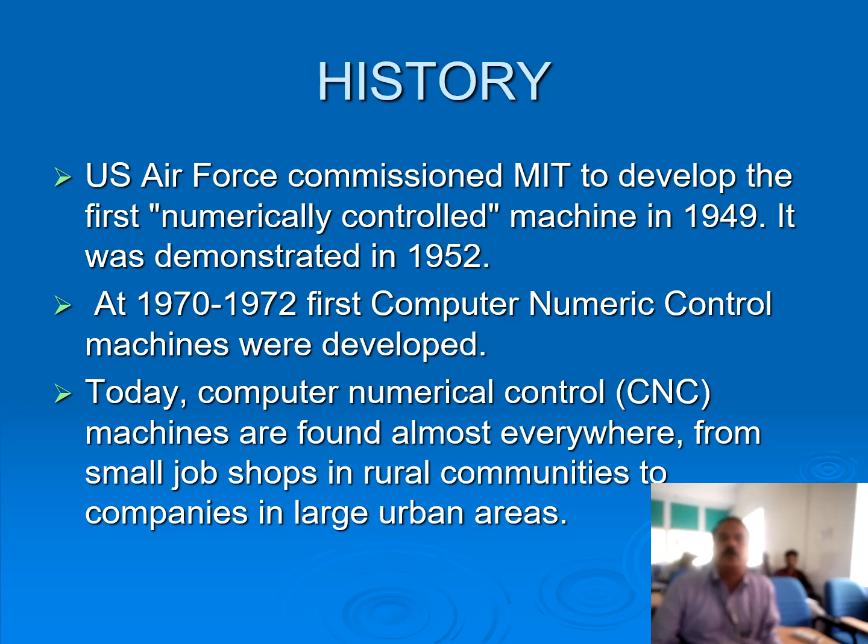To look back into the history of this CNC technology, in the US the Air Force commissioned Massachusetts Institute of Technology to develop the first numerically controlled machine in 1949. It was demonstrated in 1952. At 1970 to 1972, the first computer numeric control machines were developed. Today, computer numerical control machines are found almost everywhere, from small job shops in rural communities to companies in large urban areas.

So the definition of CNC is computer numerical control. The instructions are stored as a program in a microcomputer attached to the machine. The computer will also handle much of the control logic of the machine, making it more adaptable than earlier hardware controllers.

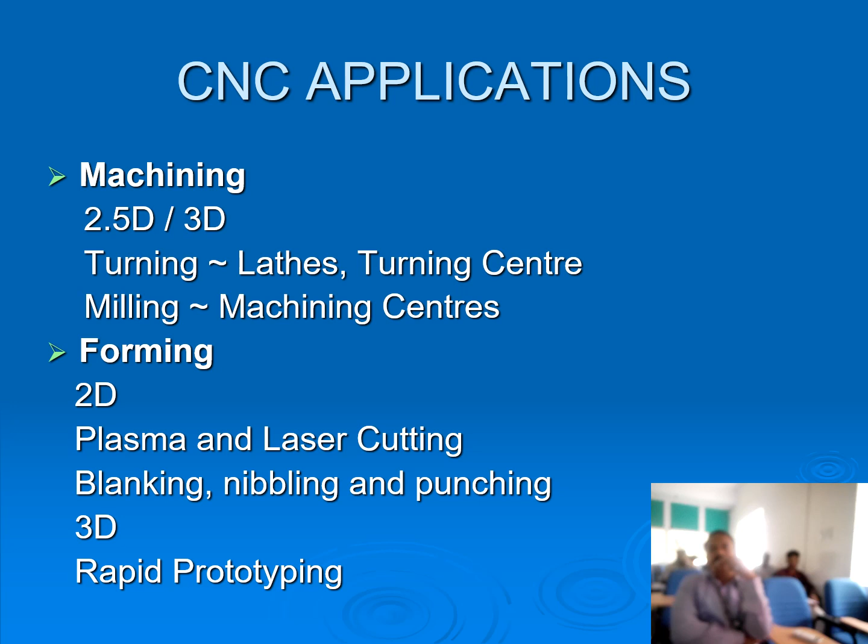When it comes to the applications of CNC, it is being used almost everywhere: in machining, 2.5D, 3D, turning, lathes, turning centers, milling centers, and in forming, 2D plasma and laser cutting, blanking, nibbling and punching. And in 3D, it is rapid prototyping.

Some of the sample CNC machines we are going to see. This particular picture shows the turning center of CNC. The turning center resembles an ordinary lathe. The only thing is, in a lathe, humans are working, and here the same operations are performed by programming, and as per the program, the microcontroller takes the program and accordingly machines the component as required.

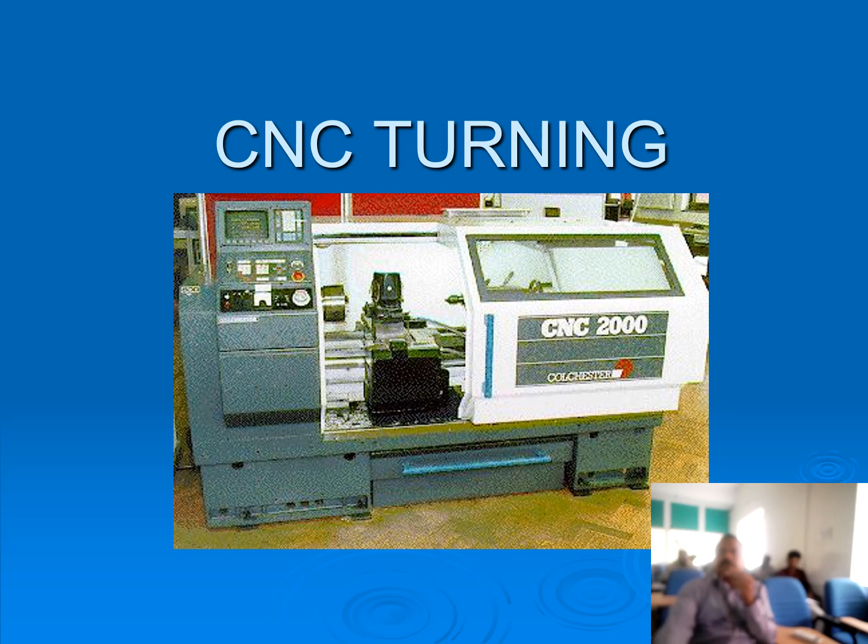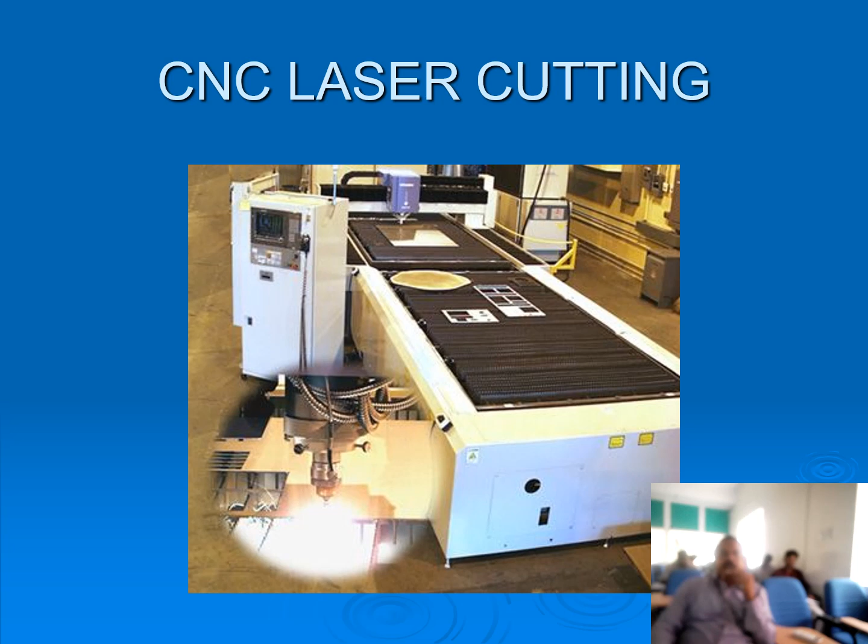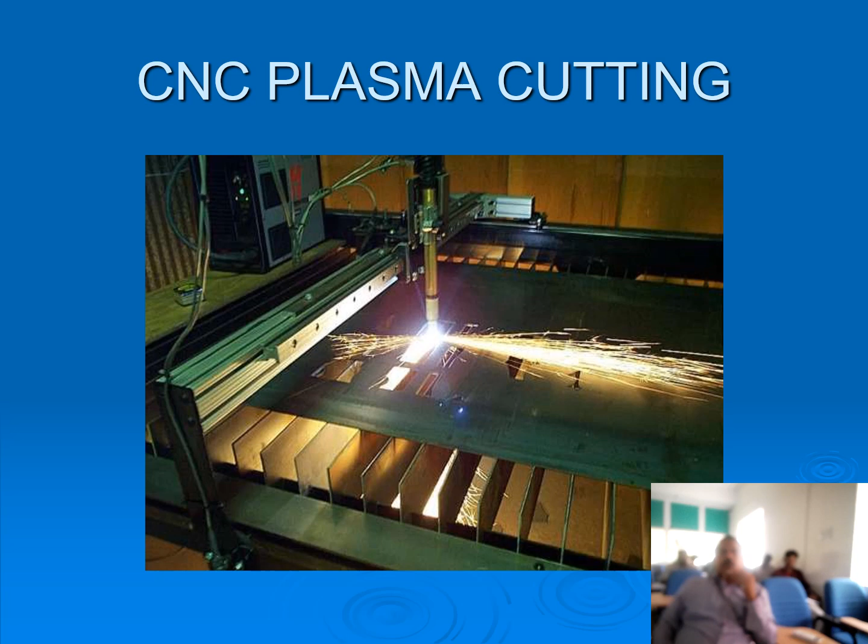Whereas all these machines, the basic difference from ordinary machines is that all are controlled by computer programming. That's the basic point where we deviate from normal technology to CNC technology. Whatever the machine, when computer programs are used to control the process in making the component, that is called CNC technology.

And this particular figure shows CNC rapid prototyping. Again, we will be seeing this in detail in the later section.

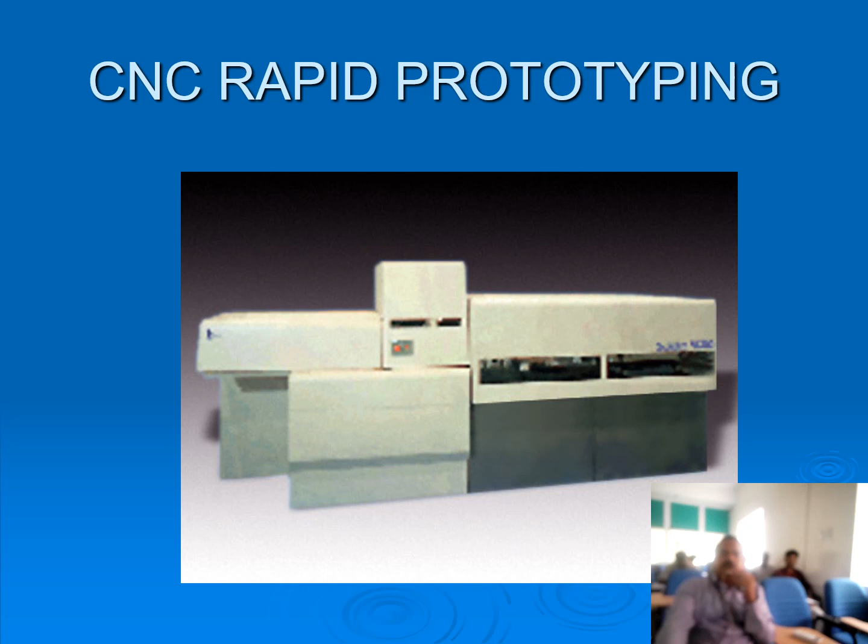Here in this particular slide, we are viewing the industries which are most affected by CNC technology, like starting from aerospace, machinery, electrical, fabrication, automotive, instrumentation, and mold making. So almost in all industries, CNC technology is being implemented, since we can make accurate, precise components, in more number and at cheaper cost.

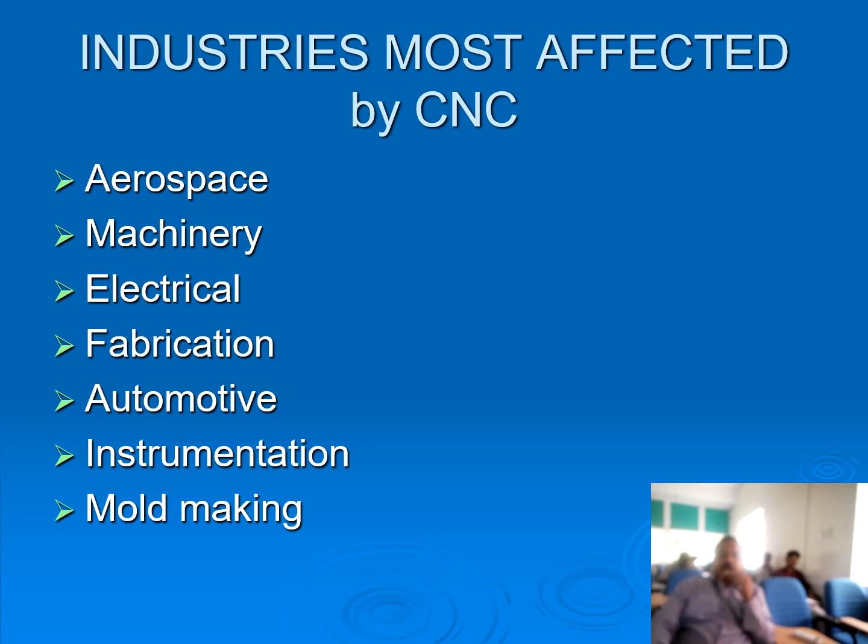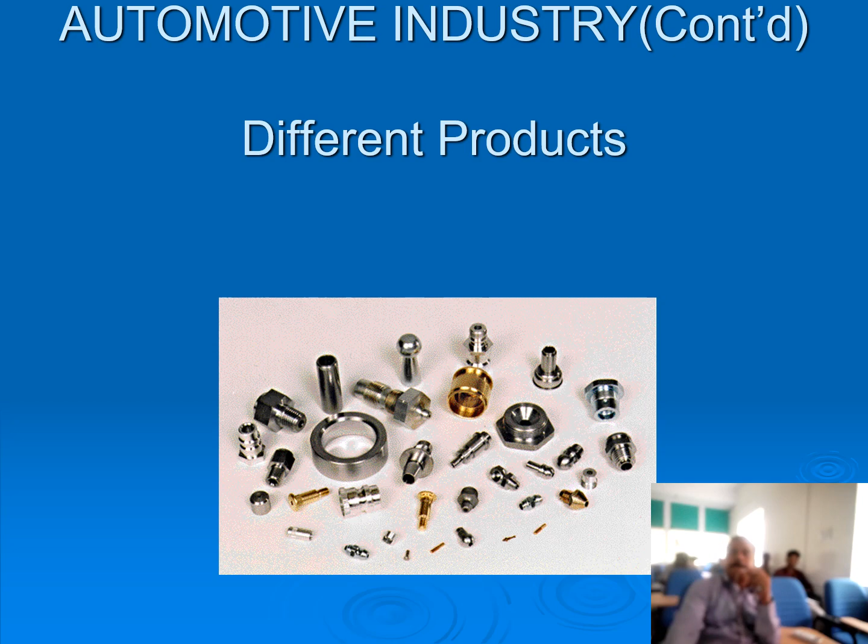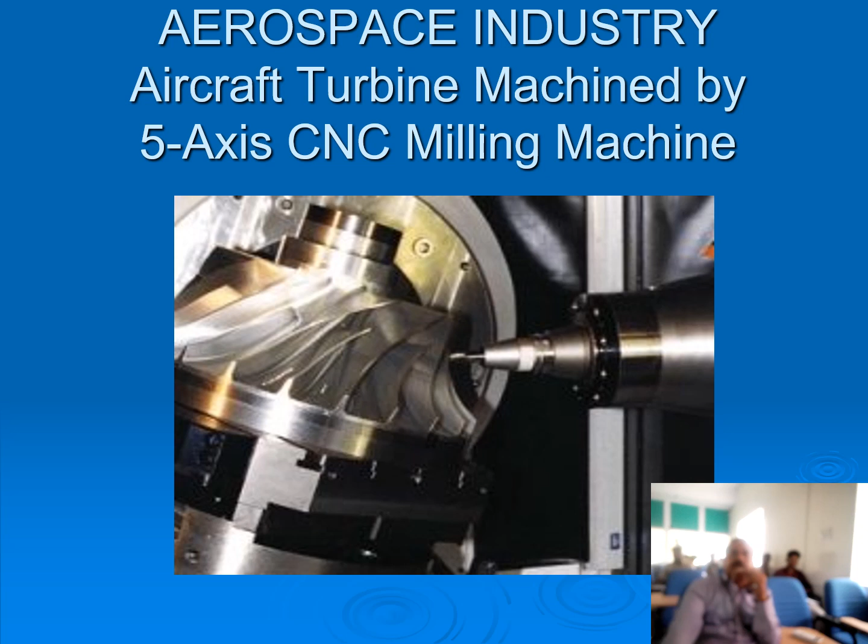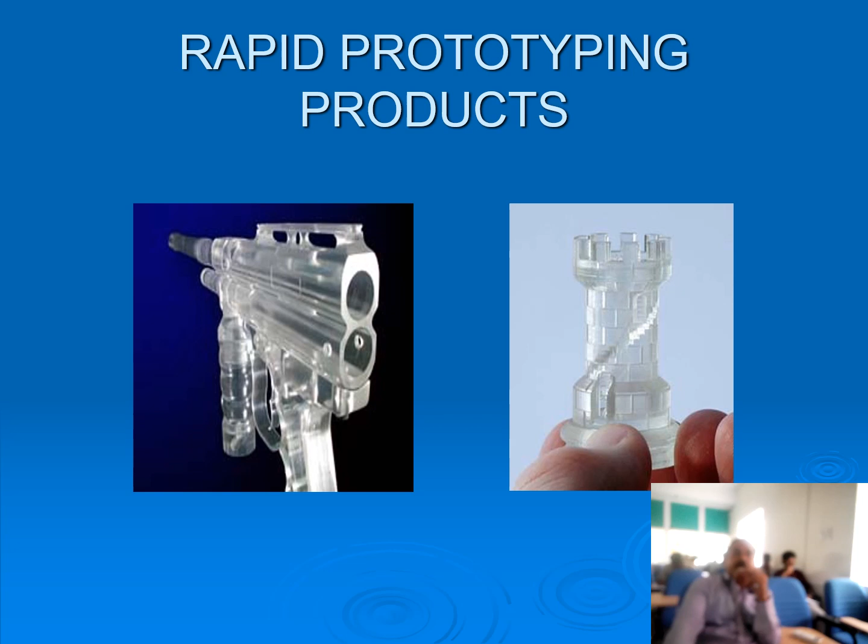And as we have already seen, the rapid prototyping machine, using that particular machine, the figures or components shown in the figure are being manufactured. This is an example of rapid prototyping products.

Now coming to the advantages of CNC, the basic thing is we make use of computers. So utilization of computers in manufacturing applications has proved to be one of the most significant advantages and developments over the last couple of decades in helping to improve the productivity and efficiency of manufacturing systems.

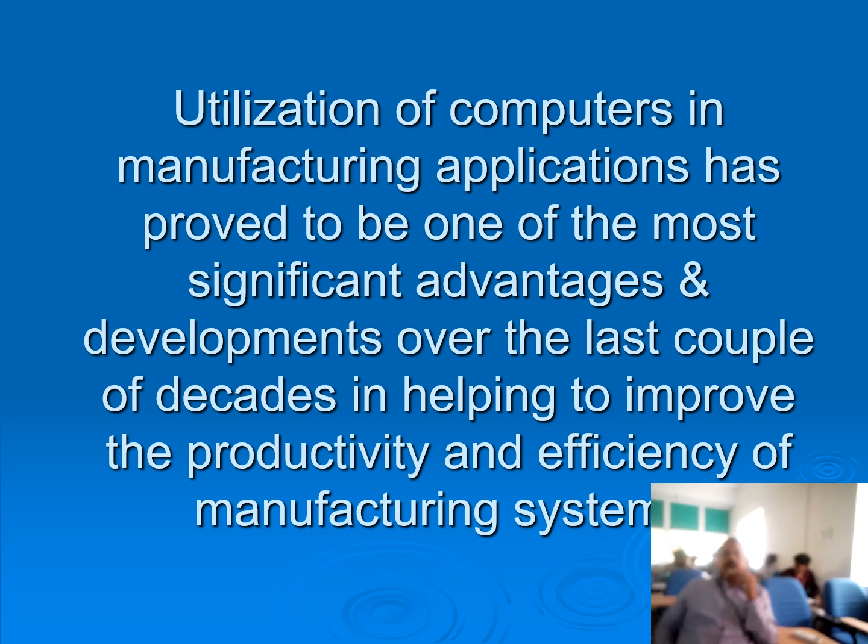Advantages of CNC: the first thing is productivity. Compared with human beings involved in manufacturing, the production rate will be less in the case of human beings being involved, whereas when you make use of these machines, the production rate is increased. That is, the machine utilization is increased because more time is spent cutting and less time is taken by positioning. In fact, when you make use of labor for doing these same things, it will take more time and hence there is less productivity.

And the second point is reduced setup time, because once you make the setup, then continuously the machine can be used to run the program and make the components. So reduced setup time increases utilization too.

Naturally the profit increases as cost decreases and as productivity increases. This we can understand easily. The important point is productivity through automation - the automation term here we use because all the processes are automated, so productivity is obtained through automation, and hence that is an advantage.

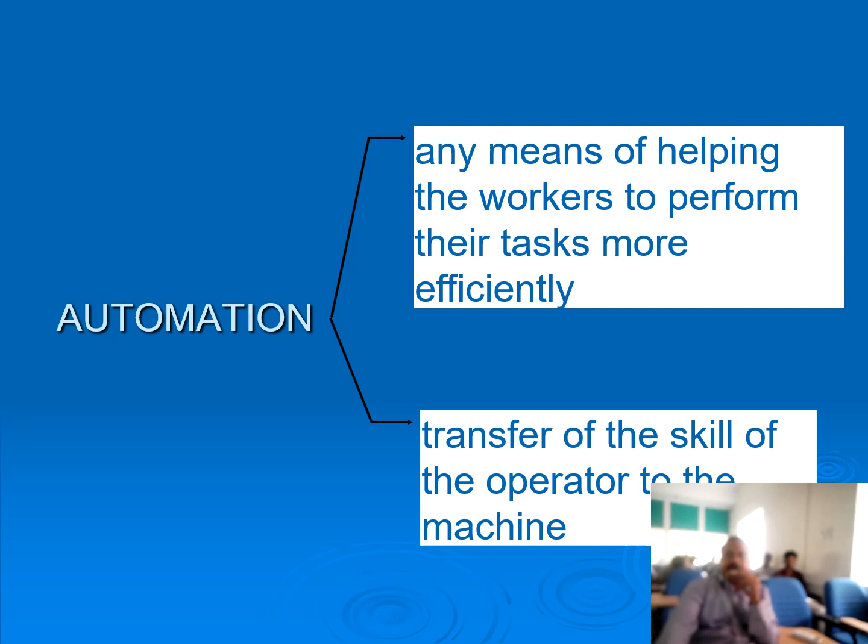Now let us see in detail what the transfer skills are and what result they produce. The first is muscle power - the transfer skill where engine-driven machine tools are used instead of the muscle power of a human being. That was the first industrial revolution we witnessed in the revolution of industries.

Manipulating skill is transfer skill number 2, and it is nothing but mechanization, and it is hard automation.

Vision skill - basically the accuracy of the manufacturing work solely depends upon the vision skill of an operator. If his vision is not sufficient, the product will not be manufactured accurately. To avoid this, we use position transducers and cameras, because of which the vision is enhanced so that the accuracy of the manufacturing product is increased. So the result is increased accuracy and part recognition.

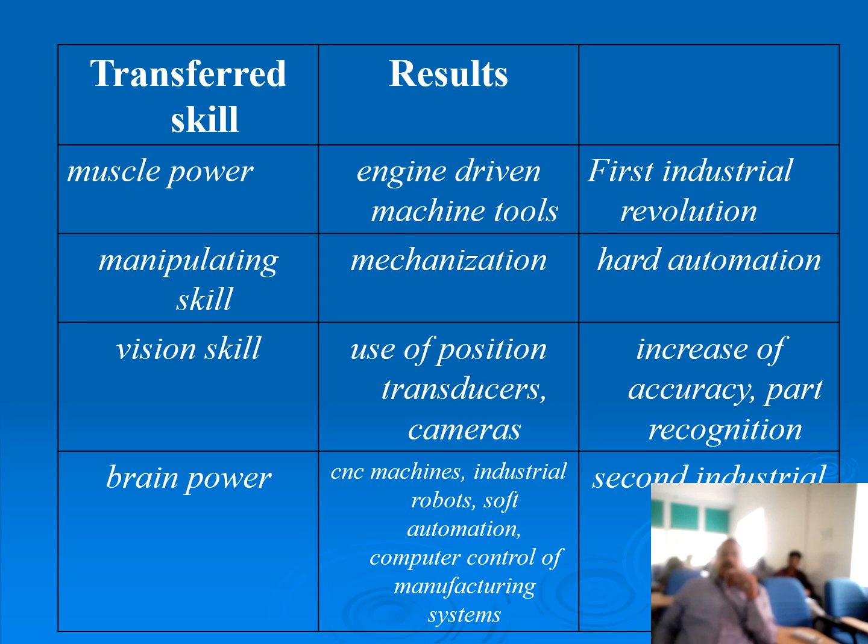Now the efficiency of manufacturing - the cost of manufacturing and cost of material handling - is one parameter for determining the efficiency of manufacturing. Productivity, number 2, is the average output per man hour. Per man hour is when an operator works on a machine for an hour, how much output comes. For example, one particular product - for 1 hour, 10 pieces are manufactured, and that is the yield, so that is the productivity.

And finally, the profit is income, whatever income we obtain, minus whatever cost is spent, like coolant oil, electricity bill, or the wages we give to the operator and so on.

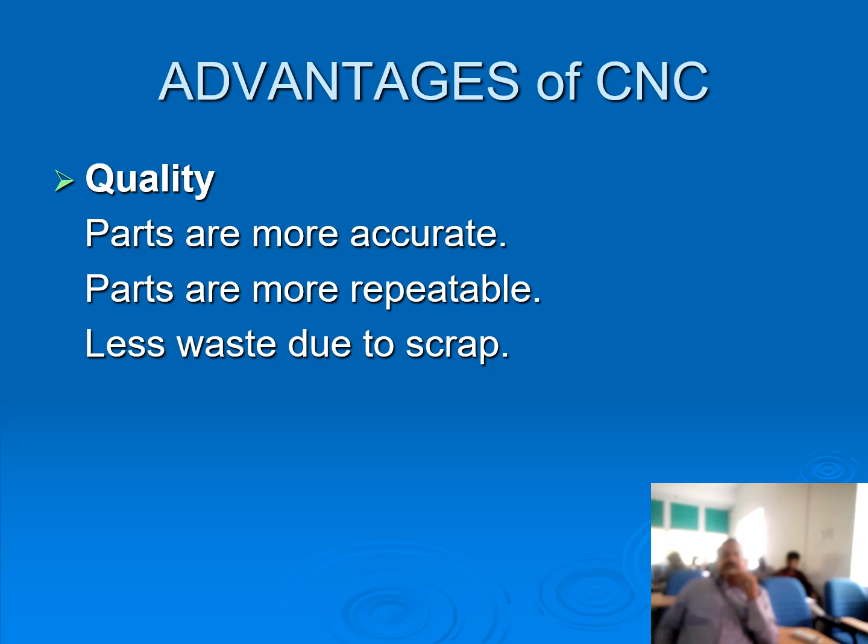To convey the advantages of CNC: quality, because quality is very, very important in fabrication and manufacturing industries. When you manufacture a product using CNC technology, the quality is assured - parts are more accurate, parts are more repeatable, and there is less waste due to low scrap.

Continuing the advantages of CNC technology: reduced inventory. Because the reduced setup time here permits smaller economic batch quantities, and lower lead time allows lower stock levels - you need not keep more stock like with conventional machines. In turn, the lower stock levels reduce interest charges and working capital requirements.

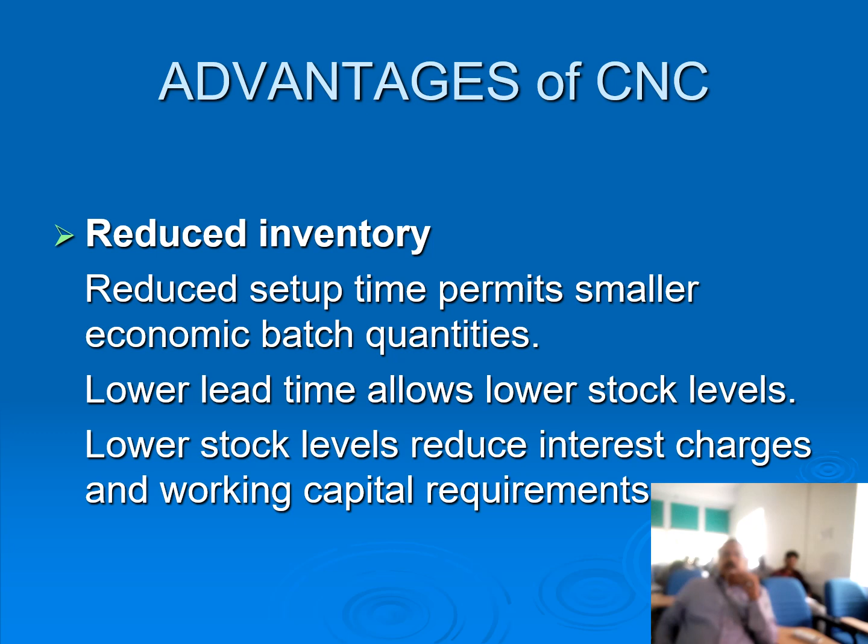Continuing the advantages here: management control. CNC leads to CAD and CAM - CAD is computer aided design and CAM is computer aided manufacturing, along with process planning and production planning.

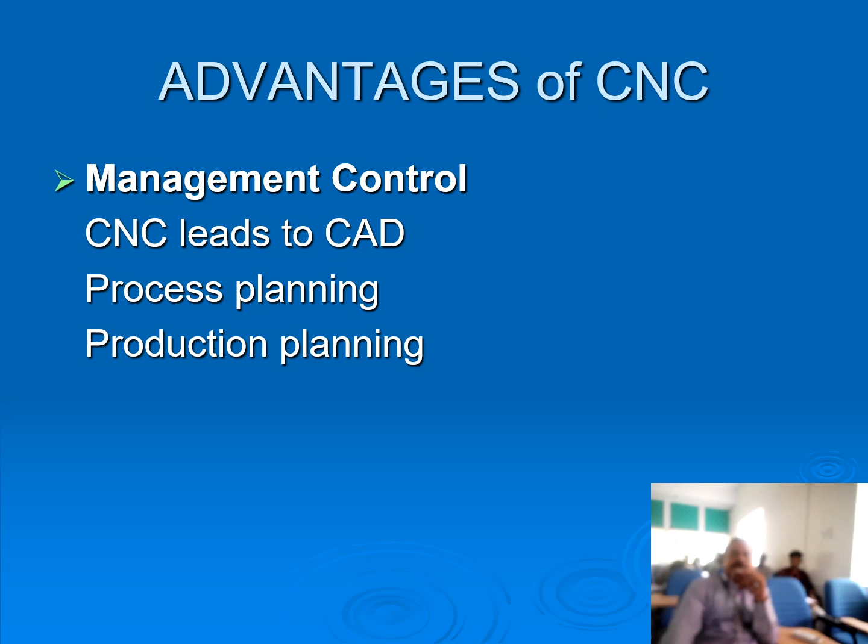Of course, whenever we talk about advantages, there are always some drawbacks. Here the drawback is like this: our ordinary conventional lathe costs around 1 to 2 lakhs, while the CNC machine costs around 12 to 15 lakhs. So it is a high capital cost we need to invest for setting up a CNC technology industry.

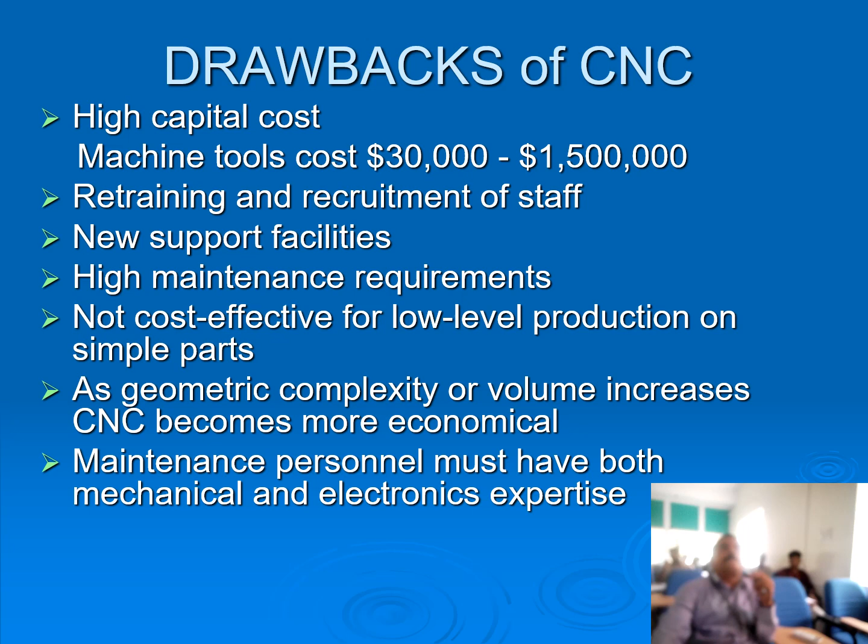Now let's see the fundamentals of basic metal cutting. Metal cutting operations, also called machining, is one of the most important manufacturing processes in industry today, as it was yesterday.

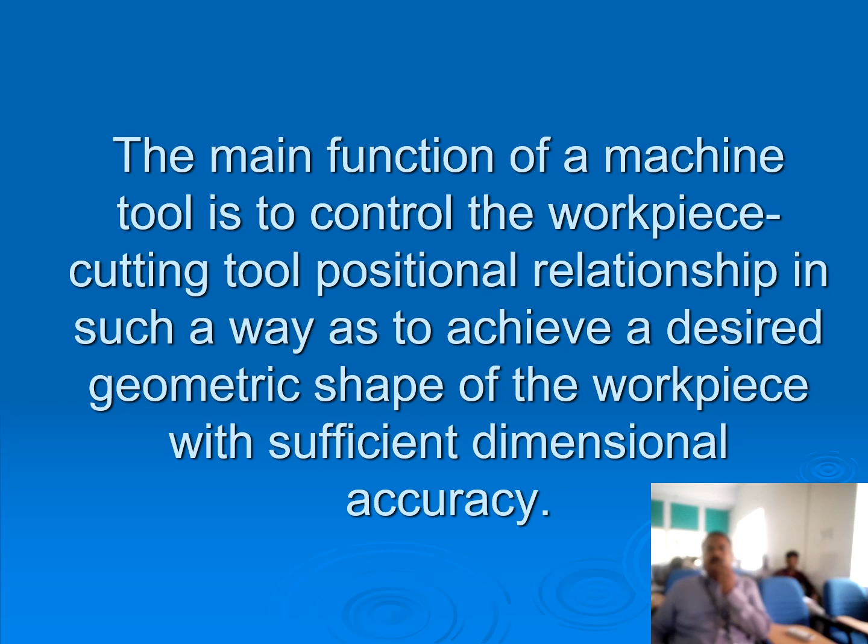What is machining? Machining is the removal of material in the form of chips from the workpiece by shearing with a sharp tool. The main function of a machine tool is to control the workpiece-cutting tool positional relationship so as to achieve a desired geometric shape of the workpiece with sufficient dimensional accuracy.

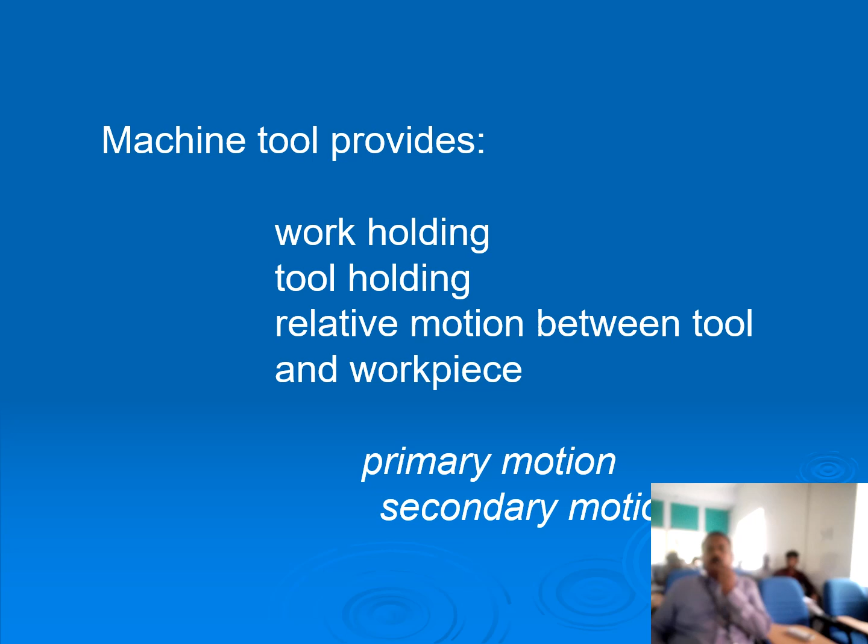The machine tool provides work holding, tool holding, and relative motion between tool and workpiece, namely primary motion and secondary motion. The primary motion is the relative motion between tool and workpiece, which leads to cutting motion and cutting speed. In the secondary motion, we have feed motion and feed rate.

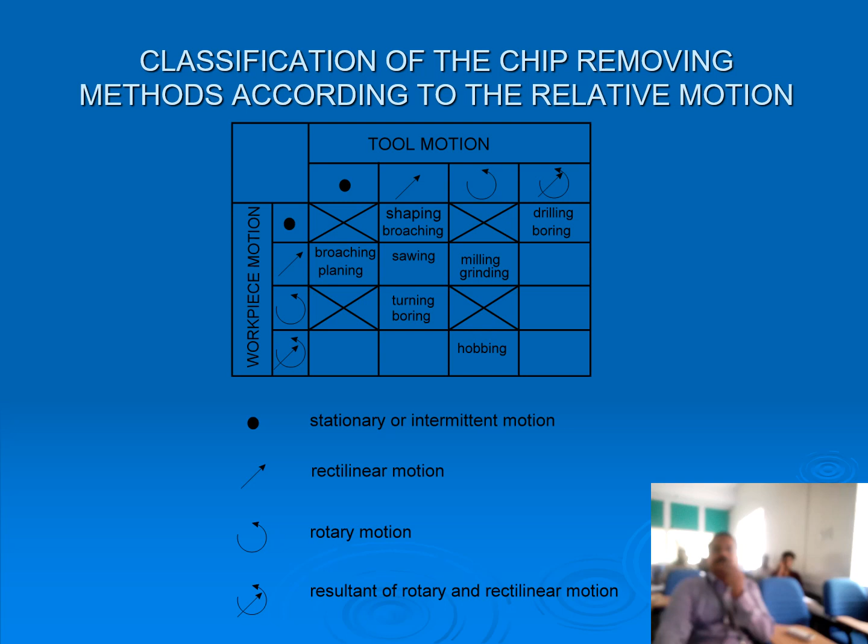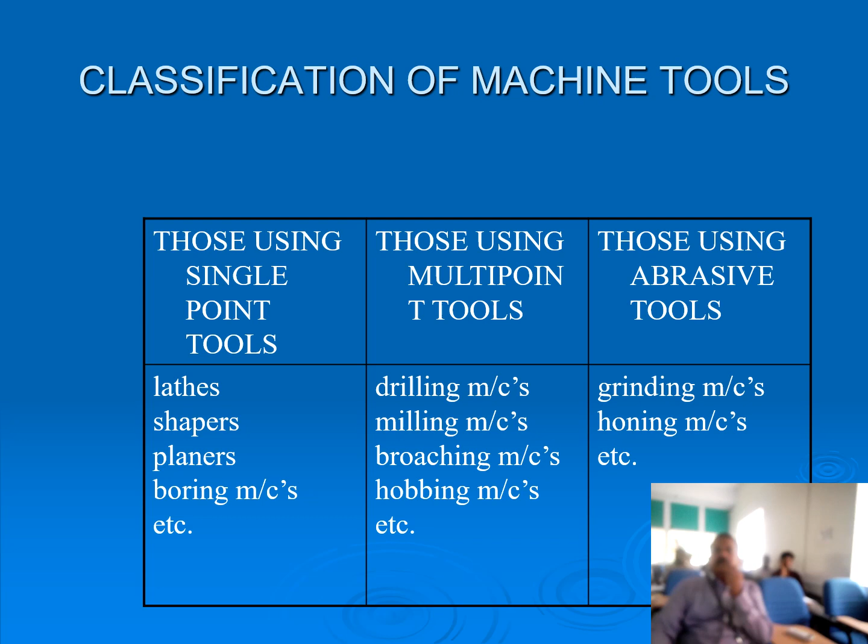So the classification of machine tools: those using single point tools - lathe, shaper, planer, boring machines, etc. Those using multi-point tools - drilling machines, milling machines, broaching machines, hobbing machines, etc. Those using abrasive tools - grinding machines and honing machines, etc.

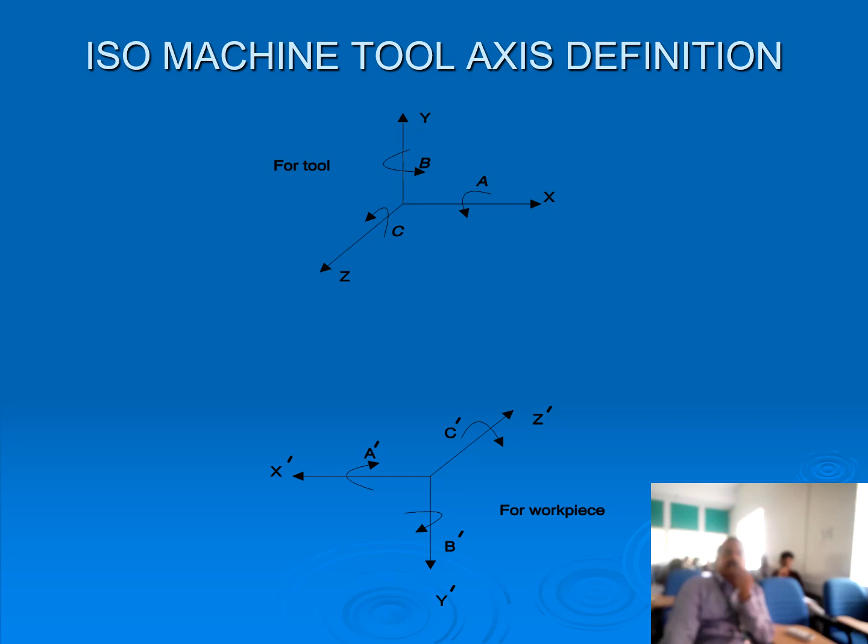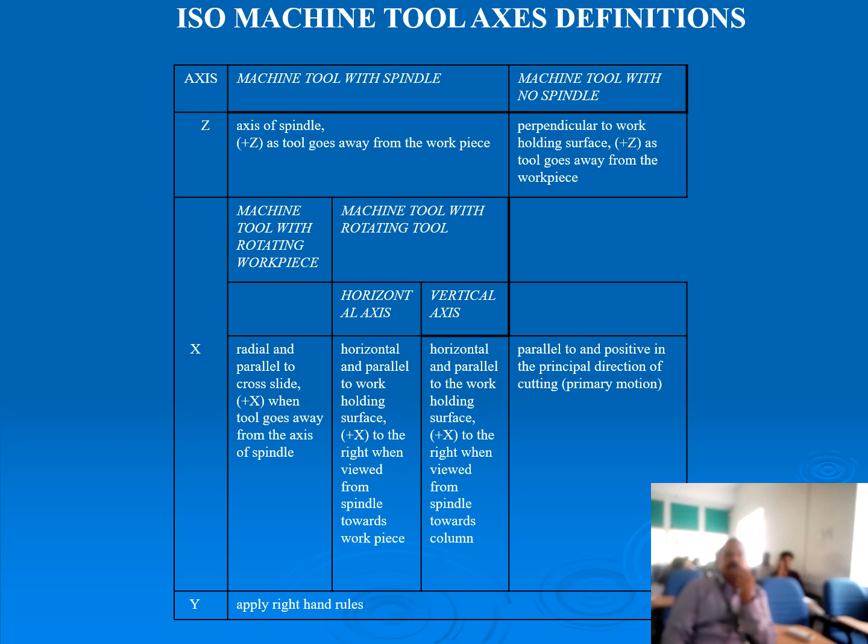So here you can see the machine tool axis definitions, for machine tools with spindle and without spindle. For all three axes - Z, X and Y - they are given definitions like this, which you can just go through.

In this figure you can see the standard lathe coordinate system. You can see clearly, this is the chuck, so automatically the x-axis is here. To the left is minus direction, minus x, and right is plus x. Z, when it goes towards the tailstock, is plus z, and when it goes towards the chuck, it is minus z. This is a two-axis machine.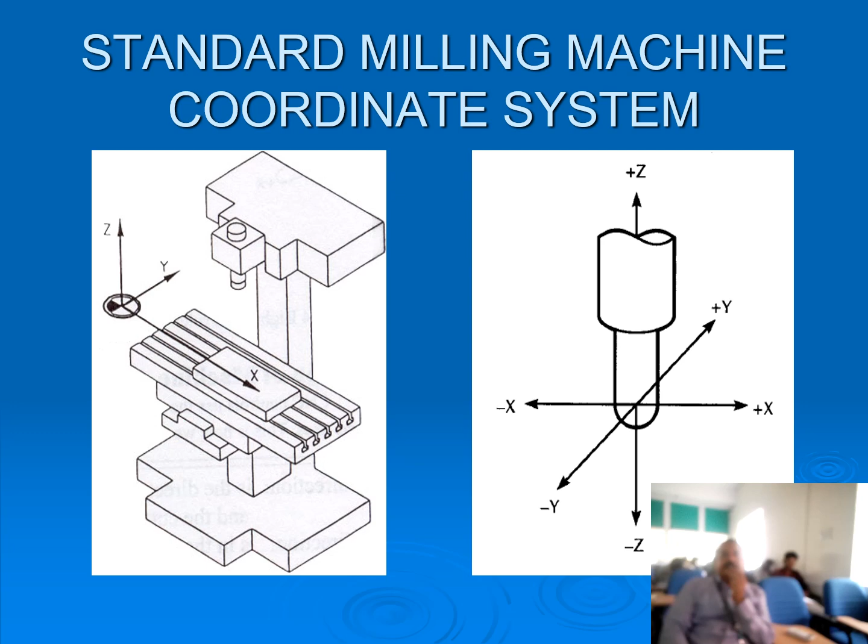So, numerically controlled machine tools. An NC machine tool has the same functionality as a conventional machine tool. There is no much difference between a tool used in an ordinary lathe and a CNC lathe. The technological capabilities of NC machine tools in terms of machining are no different from those of conventional ones.

So when you use a drill bit, you can use it in a conventional drilling machine, and the same drill bit can be used in CNC also. The difference is in the way the various machine functions and slide movements are controlled. That is most important - even though we use the same tool, how we make use of the machine functions and slide movements is important.

The functions and motions such as turning the spindle on and off, setting the cutting speeds, setting the feed rate, turning the coolant on and off, moving tool with respect to workpiece, all these things are performed by the machine control unit in an NC machine tool. This is the most important thing, because all these things are done by the operator in case of a conventional lathe, whereas here in CNC everything is controlled by the MCU.

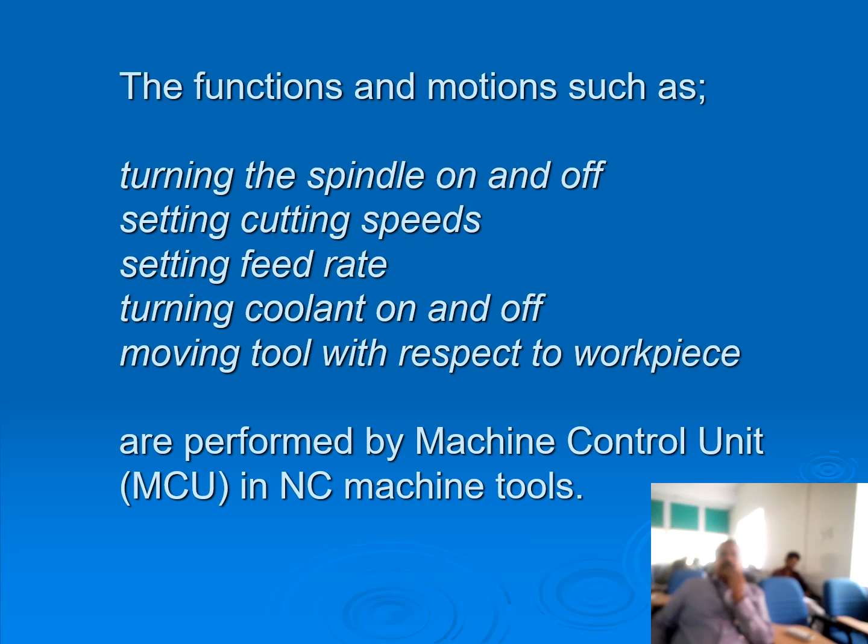Now we discuss about automation and machine tool automation.

The CNC system elements are: a typical CNC system consists of the following 6 elements. Number 1 is part program, program input device, machine control unit, drive system, machine tool, and for all these things, a feedback system. So these are the 6 important elements of a CNC system.

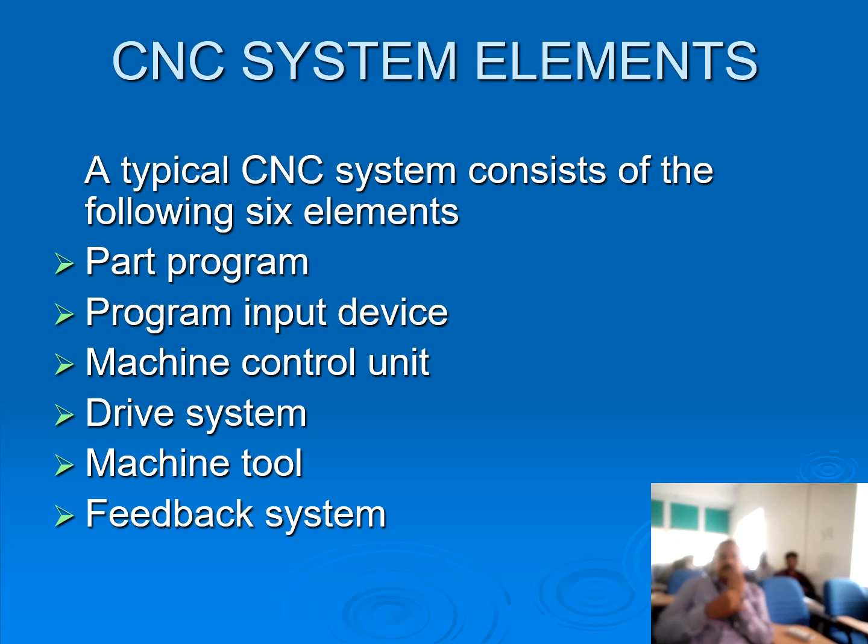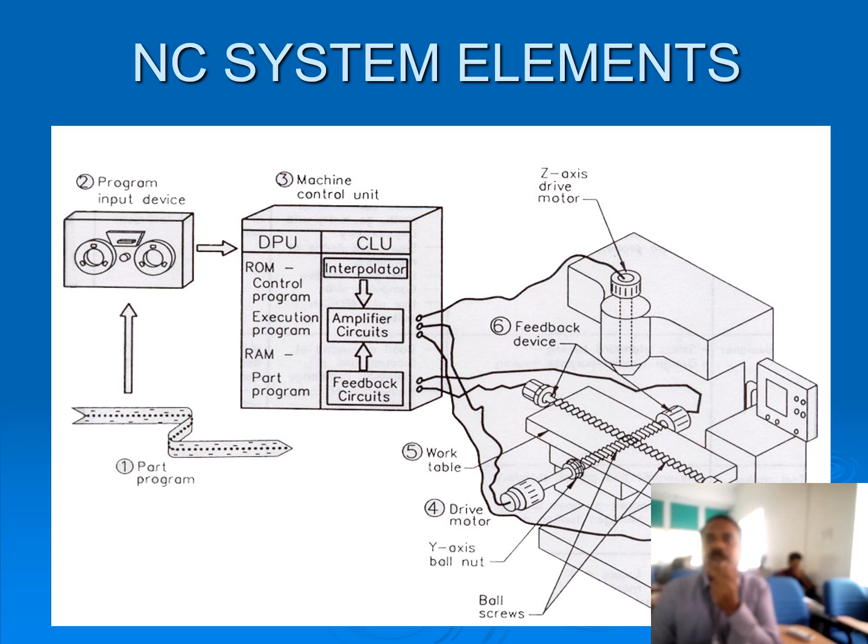On this figure you can see the 6 elements I discussed in the previous slide. Take a minute to observe this diagram, where you can see the part program, like when a punch tape comes. To input this program, we have the program input device. Here this is the machine control unit, where all things are given. This number 4 is the drive motor, and the work table is here, and the Z-axis motor is here, and the feedback device is also there. So these are the different elements.

Now the operational features of CNC machines. A CNC control system includes a velocity loop within an axis drive system and a position loop external to the axis drive system. So within the system and out of the system, we have two things. Here you can see the flow diagram of the entire thing.

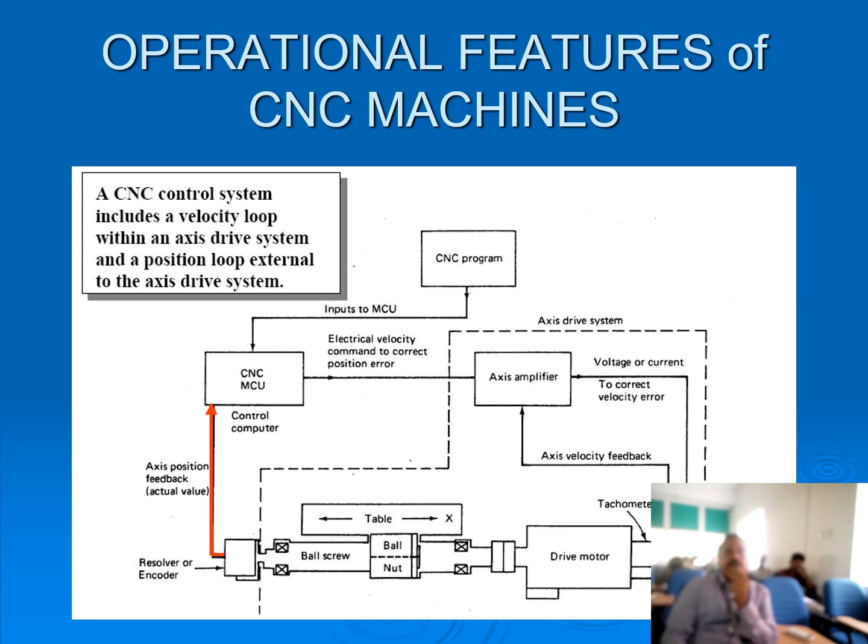Now, part program. What do you mean by part program? A part program is a series of coded instructions required to produce a part. In CNC machining, our aim is to produce the components that are manufactured in a conventional way, and for this we need to write a program. Based on the program only, the machine understands what operations are to be performed. A part program is a series of coded instructions required to produce a part, a part meaning part of a machine or component. It controls the movement of the machine tool and the on-off control of auxiliary functions such as spindle rotation and coolant on or off. The coded instructions are composed of letters, numbers, and symbols, arranged in a format of functional blocks, as in the following example.

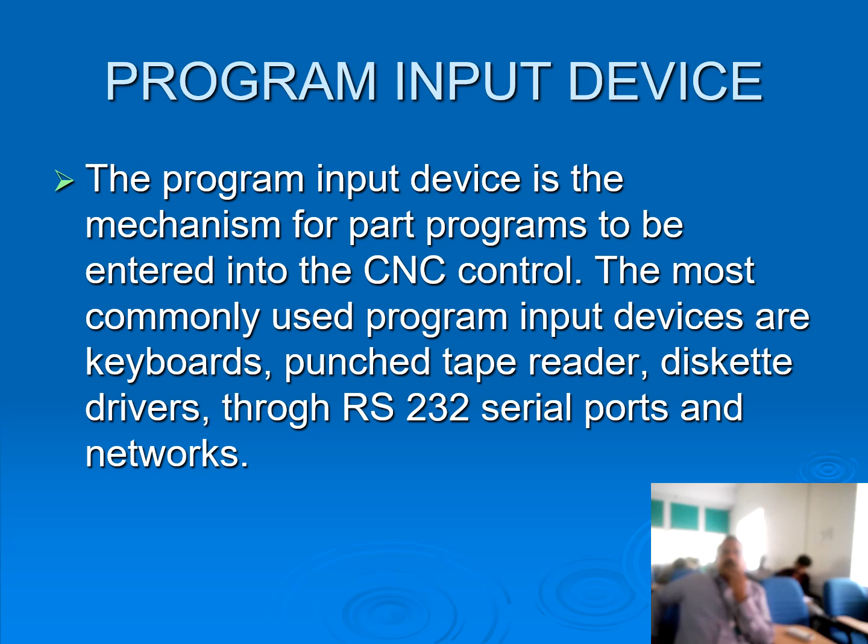Now to make the program, we have to input it, so a program input device is required. The program input device is a mechanism for part programs to be entered into the CNC controller. The most commonly used program input devices are keyboards, punch tape readers, diskette drives, RS-232 serial ports, and networks. So many input devices are available to feed the program whatever you generate.

Now, the brain of any CNC system is the machine control unit, as we discussed earlier. The machine control unit is the heart of a CNC system. It performs the following functions: read coded instructions, decode coded instructions, implement interpolations (linear, circular, and helical) to generate axis motion commands, feed axis motion commands to the amplifier circuits for driving the axis mechanisms, receive the feedback signals of position and speed for each drive axis, and implement auxiliary control functions such as spindle on/off and tool change, etc. So these are the functions of a machine control unit.

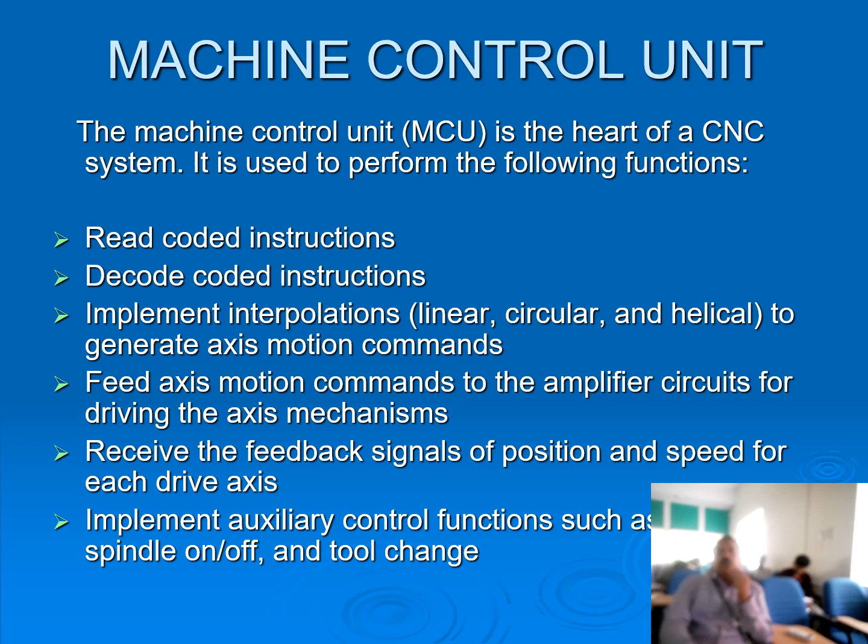Now the types of CNC control systems. When you want to control, what are the types? As we know already, there are two major types of control systems: one is open loop control and the other is closed loop control. In open loop control systems, step motors are used.

The step motors are driven by electric pulses. Every pulse rotates the motor spindle through a certain amount, and by counting the pulses, the amount of motion can be controlled. Here there is no feedback signal for error correction, so if there is an error, you cannot correct it, since it is an open loop control system with no feedback. Therefore, there is lower positioning accuracy.

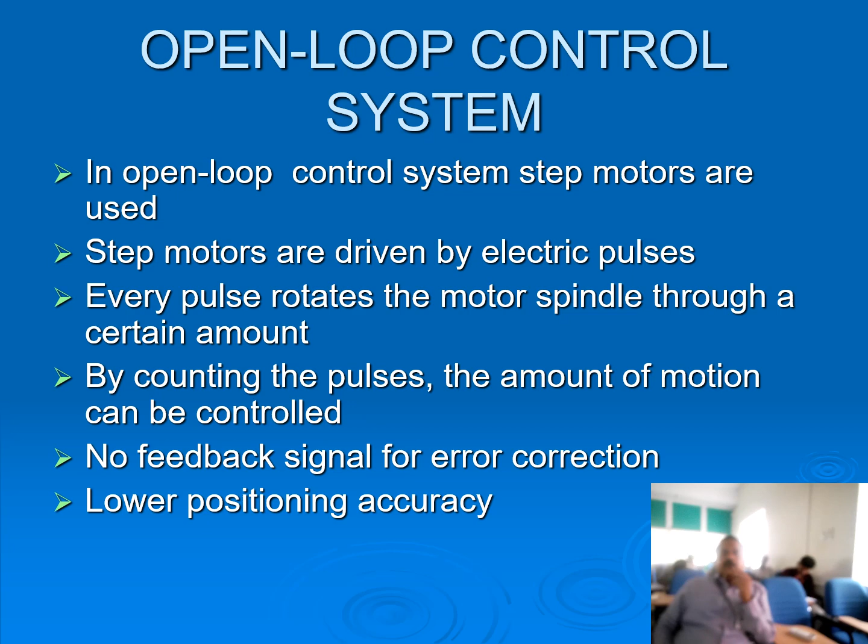Now coming to closed loop control systems. In closed loop control systems, DC or AC motors are used. Position transducers are used to generate position feedback signals for error correction. So unlike the open loop control system, here we have feedback signals that can be used for correcting errors from the previous cycle. Better accuracy can be achieved, but it is more expensive.

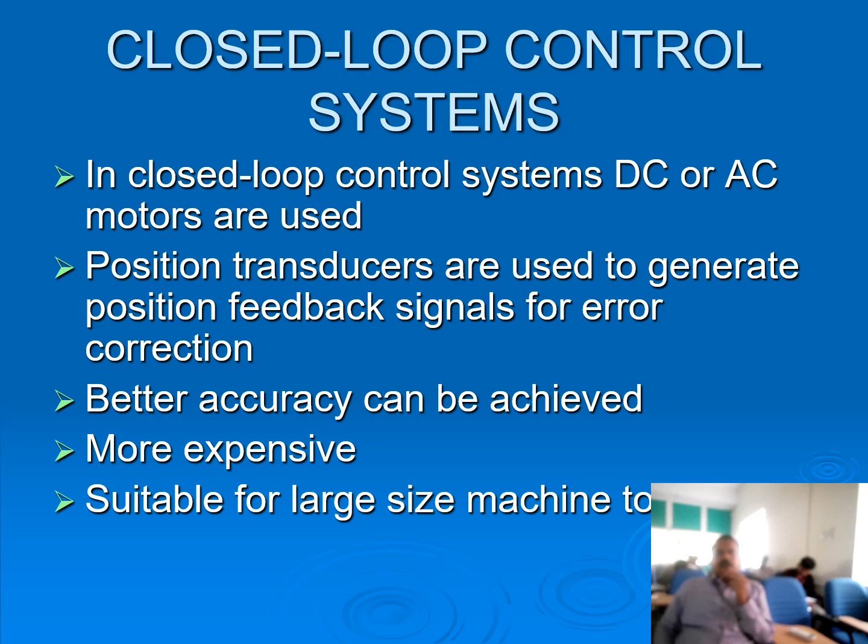This is used for large size machines, because in smaller size machines the error is not that significant. So for large machine components, we use closed loop control.

Now the drive system. A drive system consists of an amplifier circuit, stepping motors or servo motors, and ball lead screws. The machine control unit feeds control signals, that is position and speed, of each axis to the amplifier circuits. The control signals are augmented to actuate stepping motors, which in turn rotate the ball lead screws to position the machine table. So to position the machine table, we need something to drive it - the electricity should make the machine table move. To move it, we have ball lead screws, to rotate the ball lead screw we have stepper motors, and to give the feedback, we have the machine control unit.

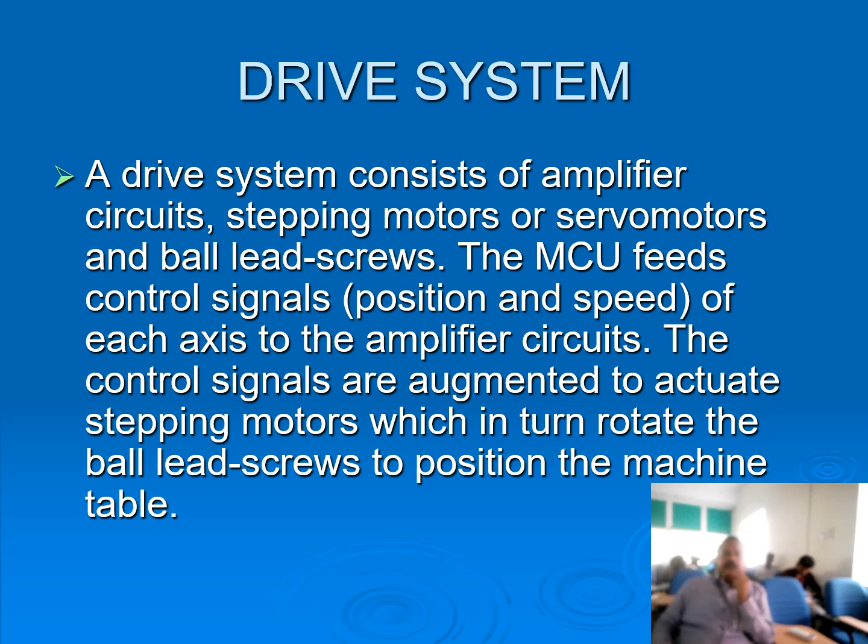The stepping motors are also called stepper motors. A stepping motor provides open loop digital control of the position of a workpiece in a numerical control machine. That is its purpose. The drive unit receives a direction input, clockwise or counterclockwise, and pulse inputs. For each pulse it receives, the drive unit manipulates the motor voltage and current, causing the motor shaft to rotate by a fixed angle, one step. The lead screw converts the rotary motion of the motor shaft into linear motion of the workpiece. So here the rotary motion is converted to linear motion by the lead screw.

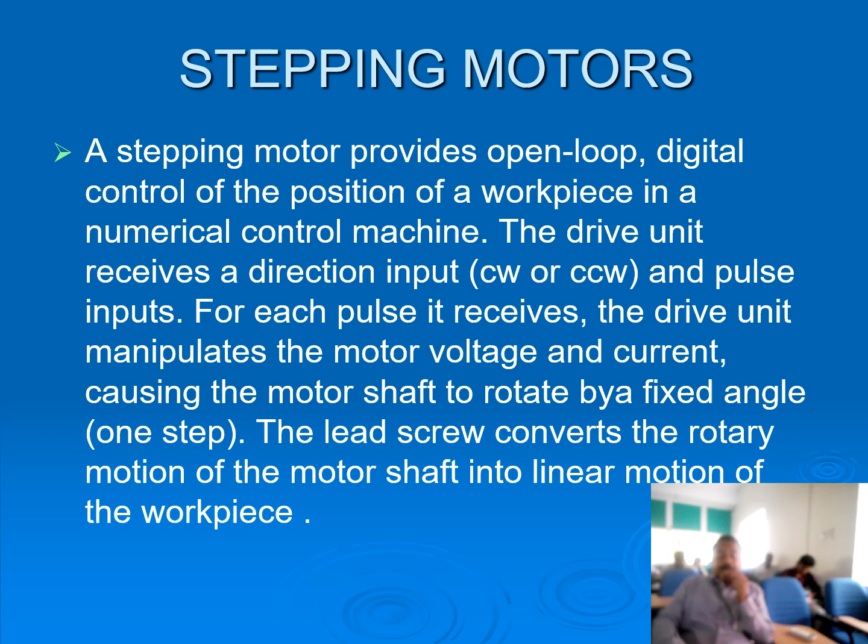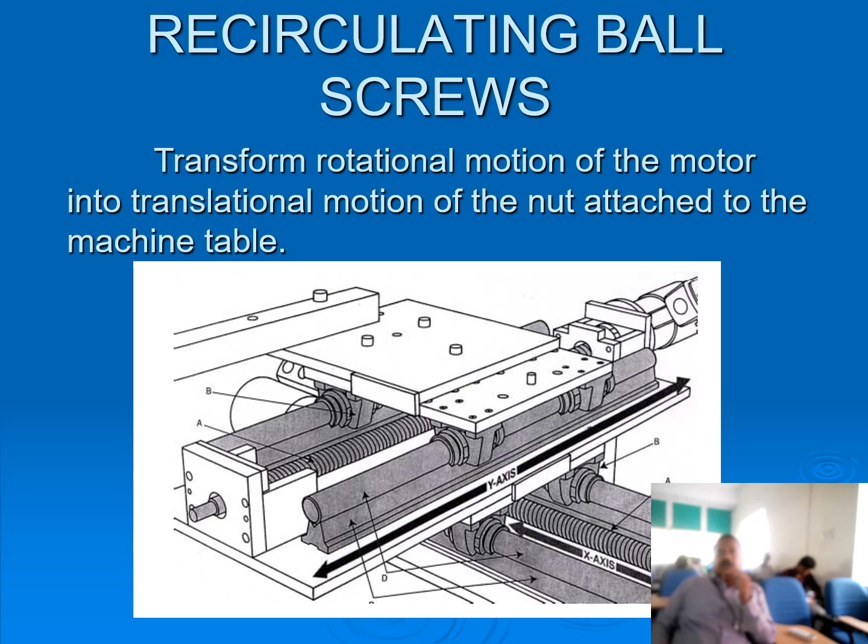Now, recirculating ball screws - for converting the rotary motion of the stepper motor into linear motion, these ball screws are used. They transform rotational motion of the motor into translational motion of the nut attached to the machine table. Therefore, the machine table can go front and back. Here you can see the photographic view of the ball screws. Accuracy of CNC machines depends on their rigid construction, care in manufacturing, and the use of ball screws to almost eliminate slop in the screws used to move portions of the machine.

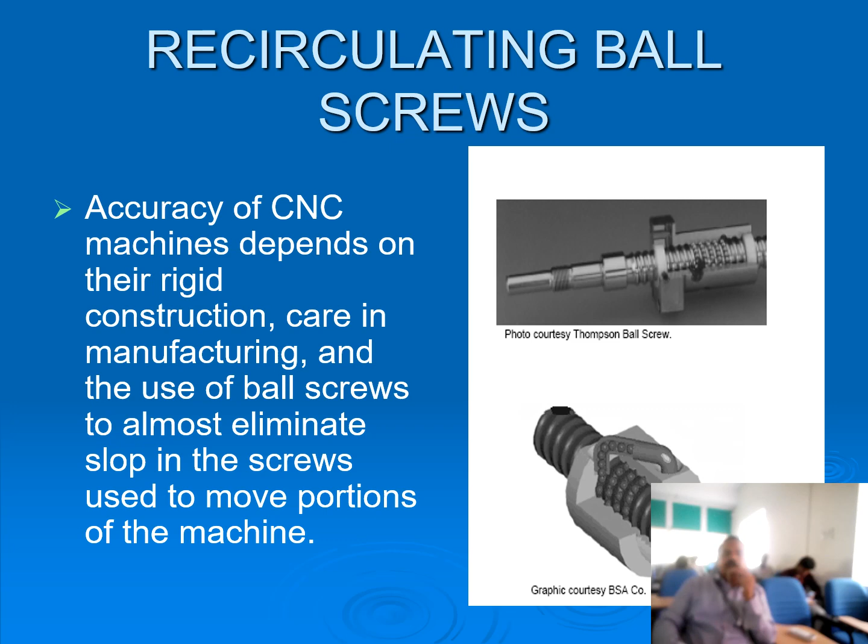This slide explains the advantages of recirculating ball screws. In the first column you can see parameters like inexpensive, low power use, low maintenance, high accuracy, high repeatability, high efficiency, high load capacity, and compact size.

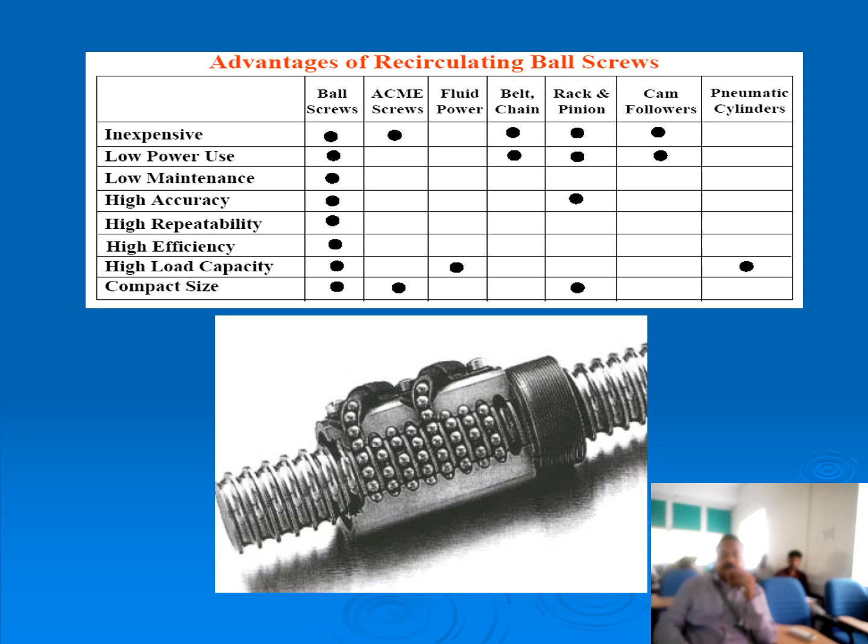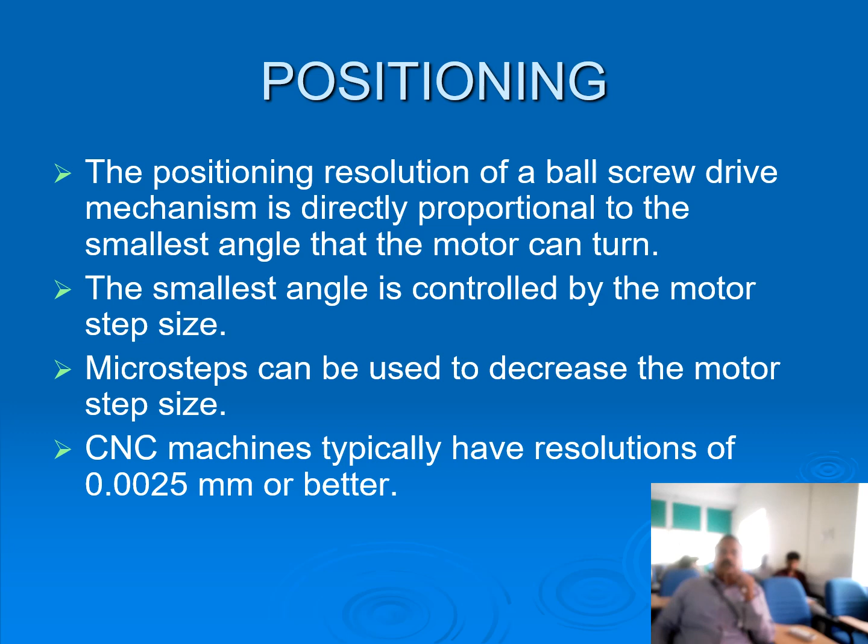Positioning: the positioning resolution of a ball screw drive mechanism is directly proportional to the smallest angle that the motor can turn. The smallest angle is controlled by the motor step size. Micro steps can be used to decrease the motor step size. CNC machines typically have resolutions of 0.0025 mm or better. So you can see how high the accuracy and resolution is, because of the advantages of using a computer in conventional machines.

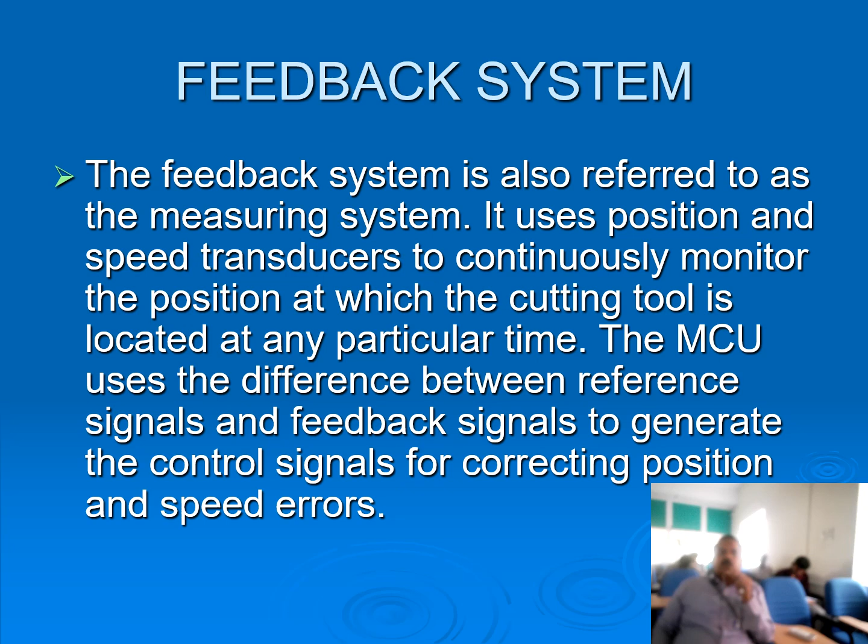So what are the feedback devices we use in CNC machines? Encoders. An encoder is a device used to convert linear or rotational position information into an electrical output signal. So the physical parameter, like linear or rotational position, is converted by this encoder into an electrical signal, which is the output.

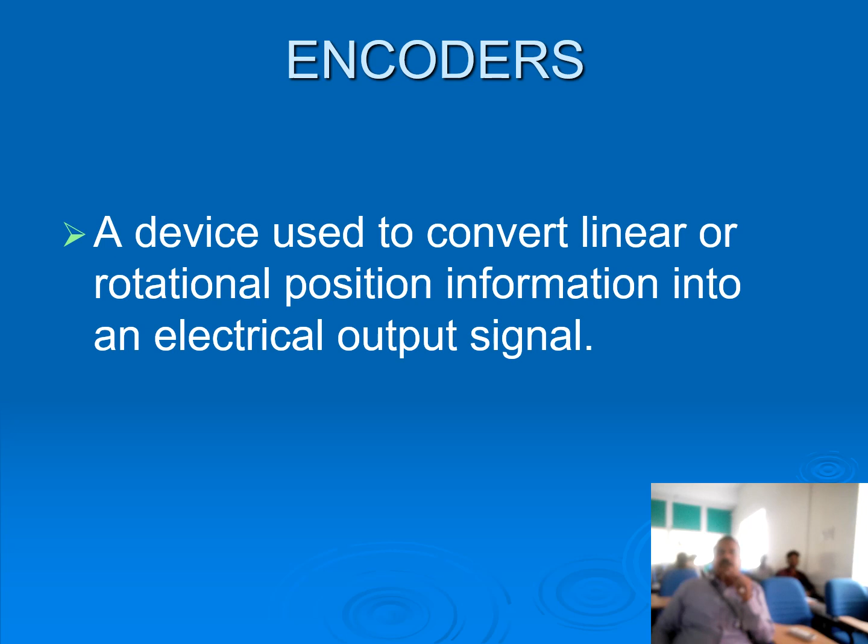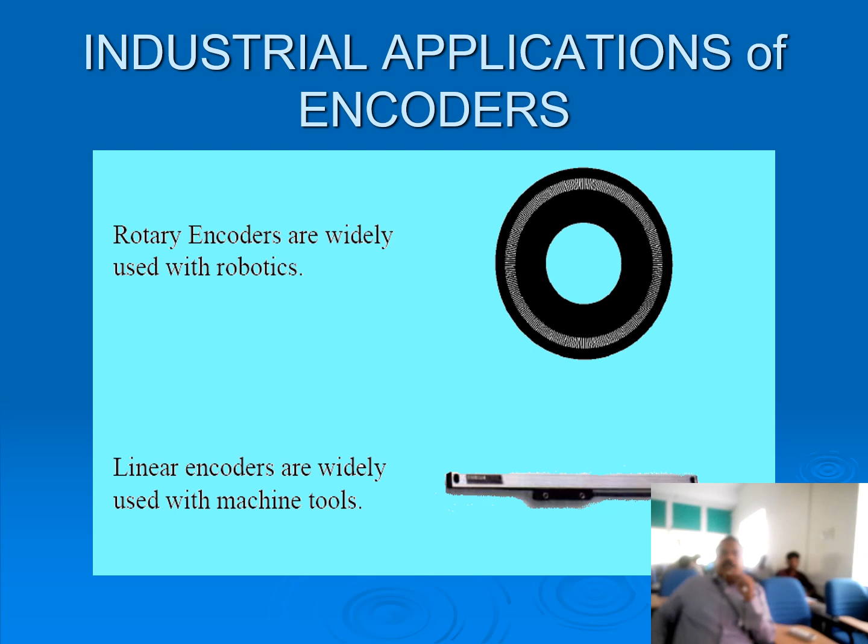The encoder types include magnetic, LVDT, optical, contacting type, or capacitive type. Now, industrial applications of encoders: rotary encoders are widely used with robotics because of the need in robotics, and linear encoders are widely used with machine tools.

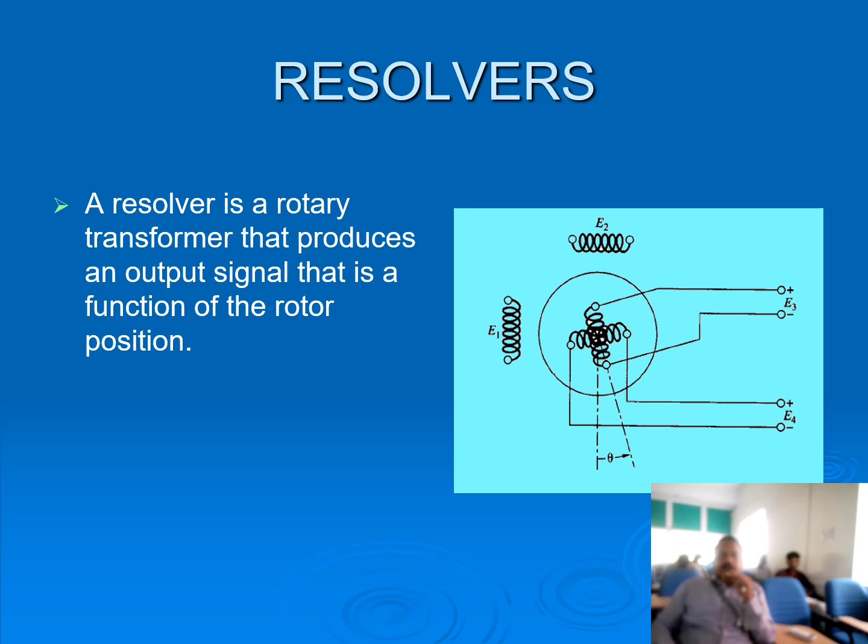Now the drive motors. As we discussed already, we need to convert the electric signal into a mechanical one, for which we use various motors, and those motors are DC servo motors, AC servo motors, stepper motors, and hydraulic motors.

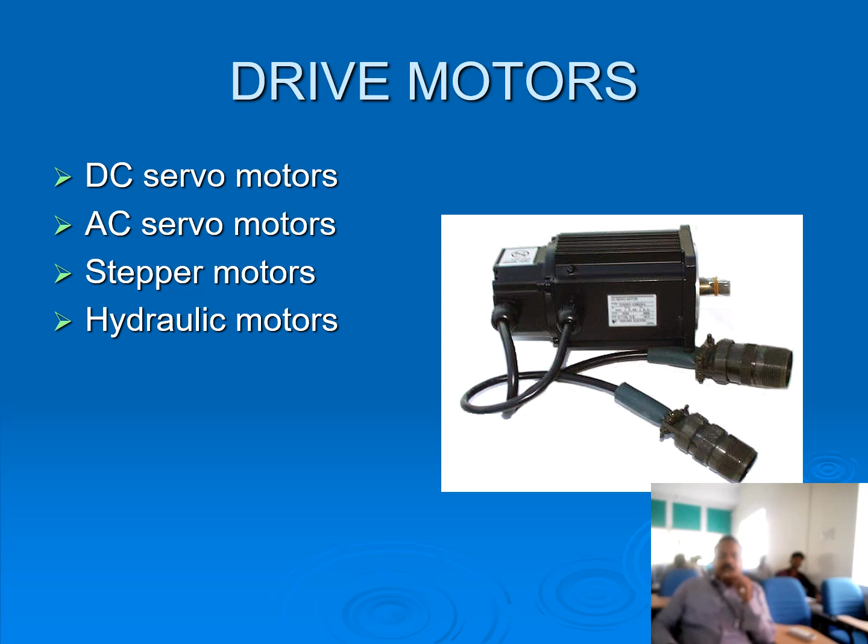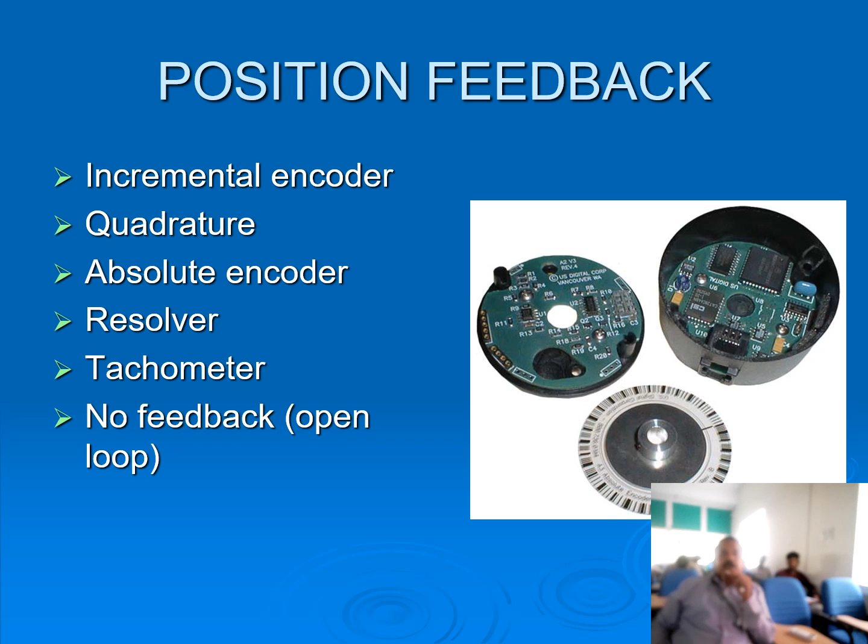The position feedback. As we discussed already, the position should be given as a feedback, then only the error correction can be done. So it's possible by the incremental encoder, quadrature, absolute encoder, the resolver, tachometer, or no feedback. When there is no feedback, it comes under open loop, whereas the above five are closed loop control. For example, the tachometer is for giving the speed.

Here you can see the potentiometer. It is made of material with constant resistance per unit length properties, and the potentiometer is basically a position level device where the wiper position can be computed. That is the use of a potentiometer. So this is how the potentiometer looks like, and you can see various forms of it.

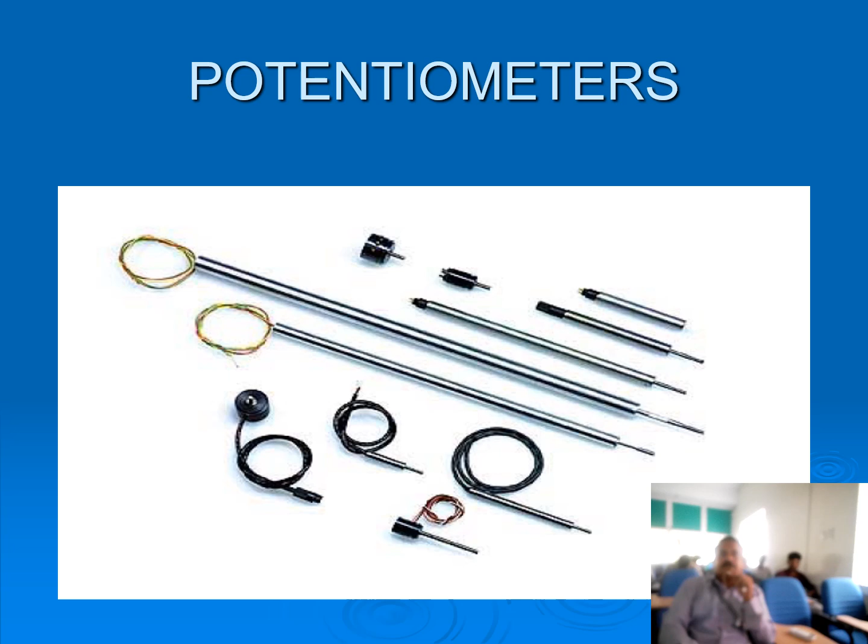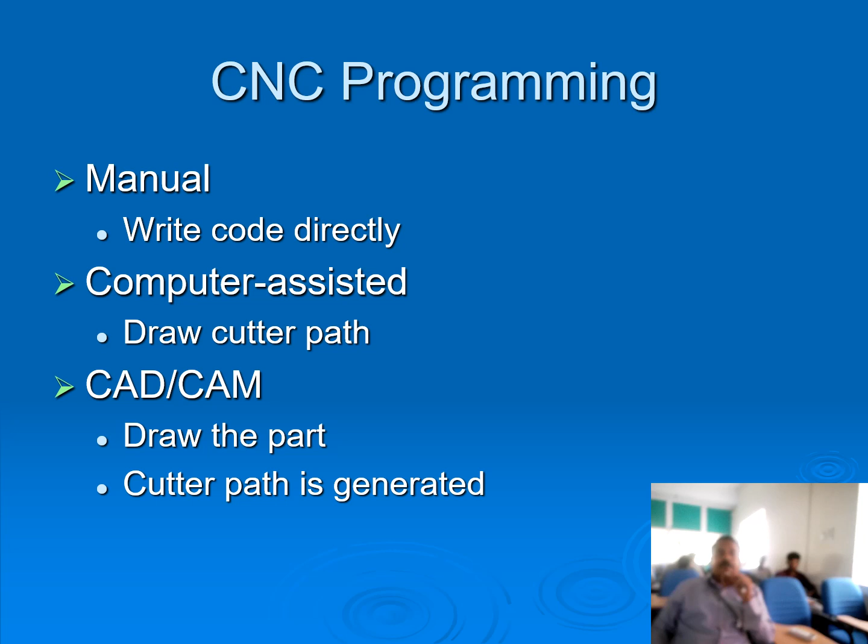Now coming to the programming side of CNC technology, we basically make a program to produce a component based on the drawing. This can be done either manually, where we write the code directly, or computer assisted, where we draw the cutter path, or use CAD CAM to draw the part, and based on that, the cutter path is generated.

Then the velocity feedback. As I mentioned in the previous slide, tachometers are used to give the speed parameter, so electrical output is proportional to the rate of angular rotation in tachometers. For encoders, resolvers, and potentiometers, the number of pulses per time is proportional to the rate of change of position. So whether it is an encoder, resolver, or potentiometer, they represent a change of position, giving it as number of pulses as the output.

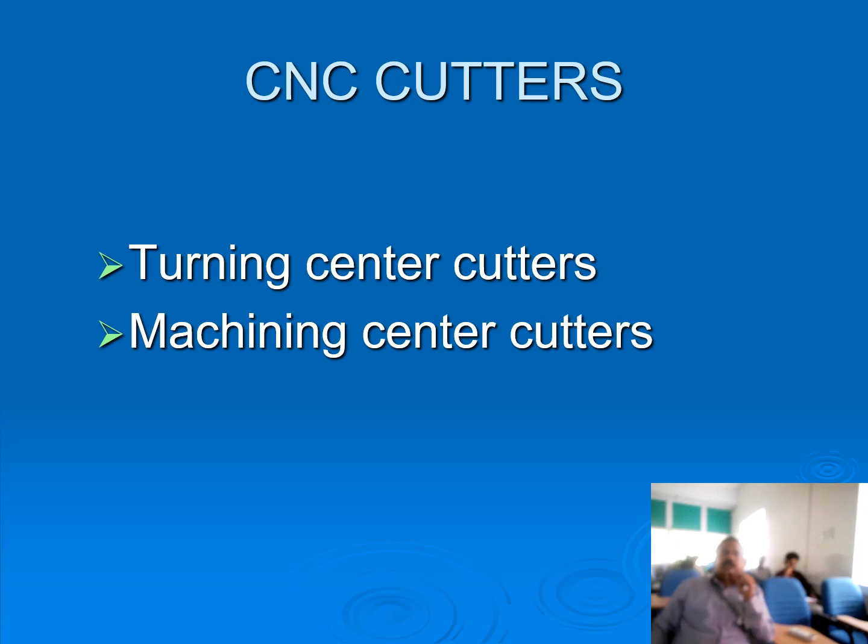The cutters or cutting tools of CNC machines: we have turning center cutters and machining center cutters. The turning center is nothing but a lathe, and the machining center is like a milling machine.

The turning center cutters: types of cutters used on CNC turning centers include carbides and other hard materials, inserts, turning and boring tools. Generally we make use of carbides for the inserts so that it can cut almost all the normal materials like MS, aluminium, brass, etc. Or we go for ceramics, and for normal things we use HSS also, drills and taps.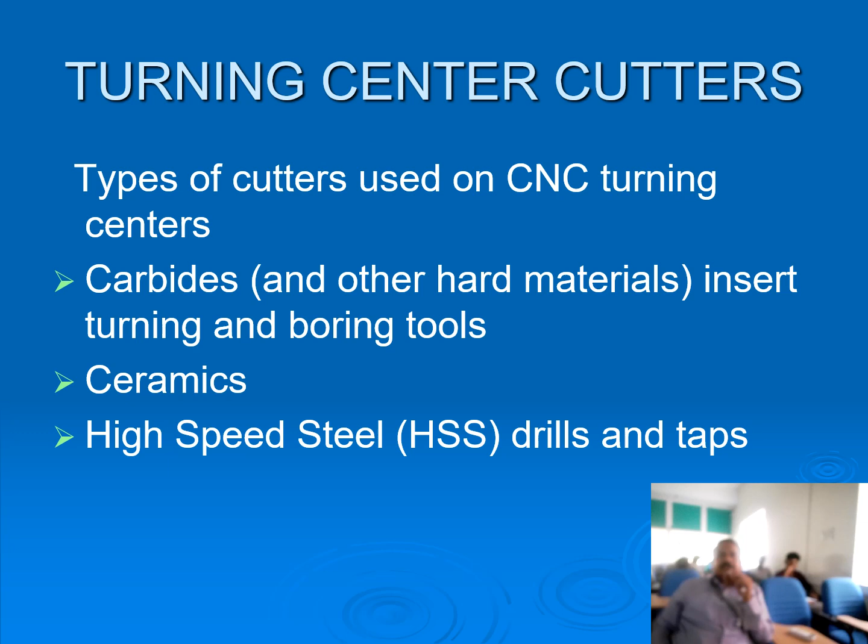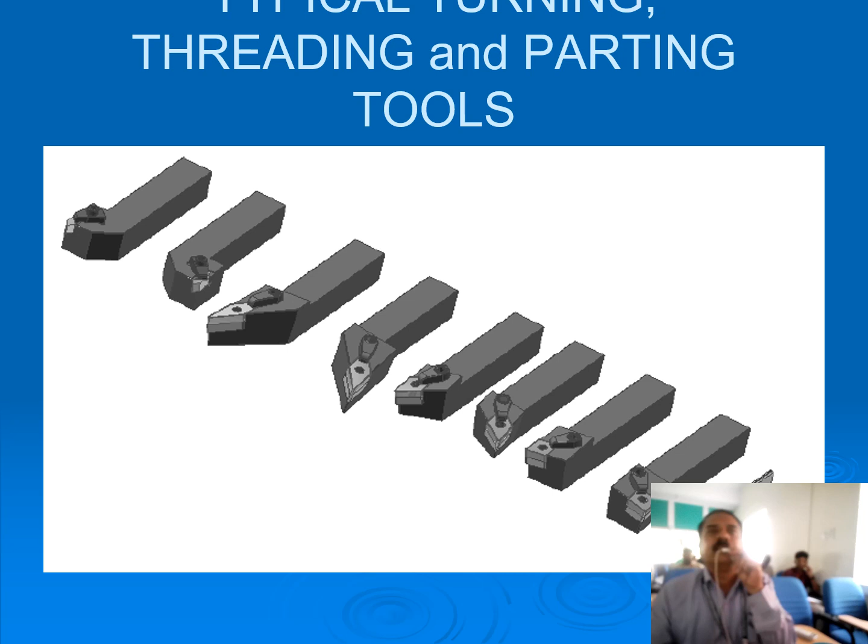So these are the threading and parting tools where you can see this particular insert. In the tool, we make use of the insert, so only this insert part will be involved in cutting. The other part is just to hold the insert.

Now coming to machining center cutting tools. Most machining centers use some form of HSS or carbide insert end mill as a basic cutting tool. Insert end mills cut many times faster than high-speed steel, but high-speed steel end mills leave a better finish when side cutting. So these are some comparisons.

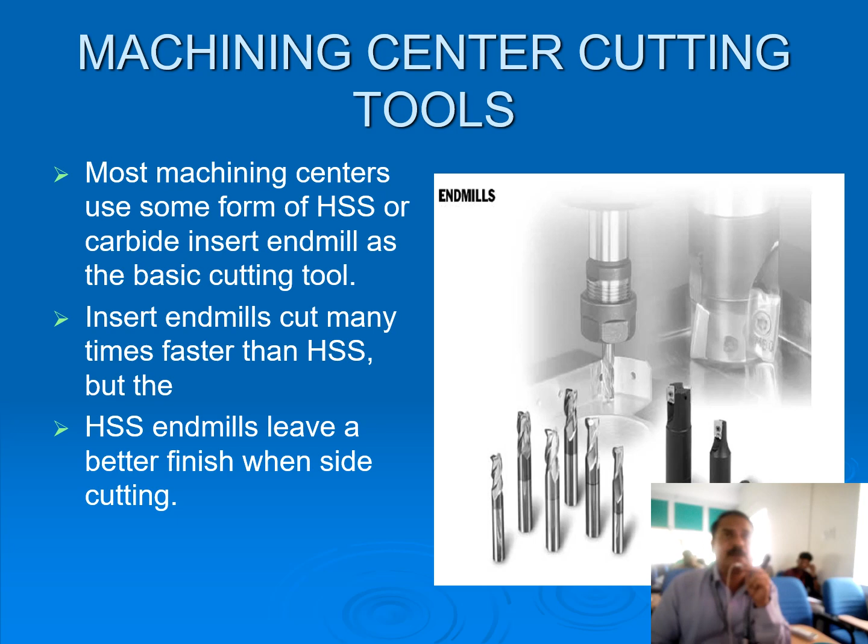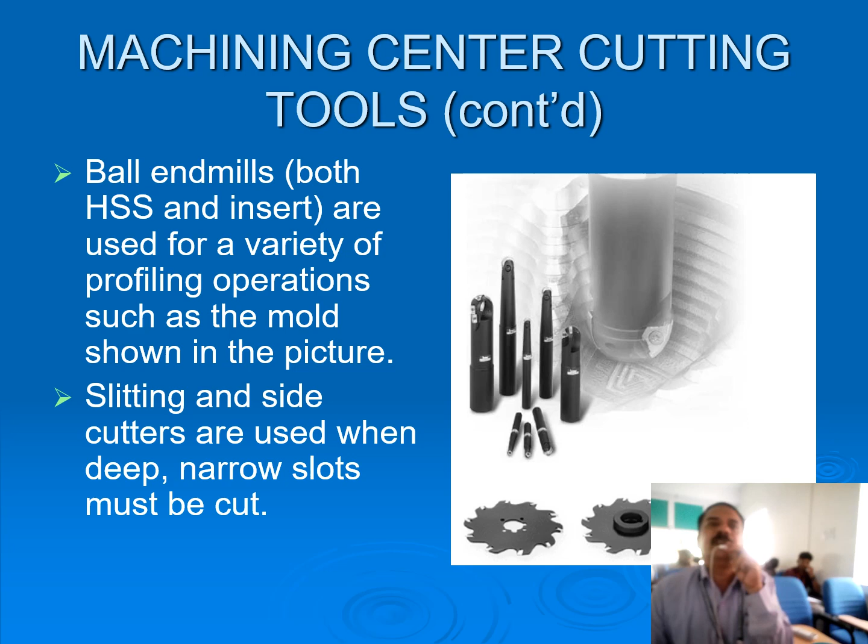Ball end mills, both high-speed steel and insert, are used for a variety of profiling operations such as the mold shown in the picture here. Slitting and side cutters are used when deep narrow slots must be cut.

Here you can see how the drill, tap and reamers look. Common HSS tools such as drill, tap and reamers are commonly used on CNC machining centers. Note that a spot drill is used instead of a center drill. Also, spiral point or gun taps are used for through holes and spiral flute for blind holes. Rarely are hand taps used on a machining center, though sometimes when required, we use hand taps also in a machining center.

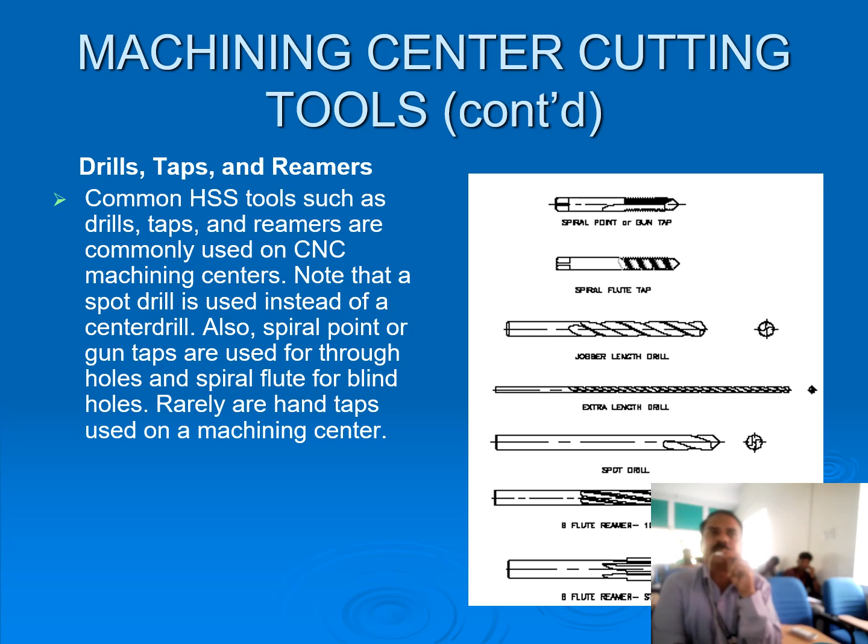Most machines in the USA use a CAT taper, which is a modified NMTB 30, 40 or 50 taper that uses a pull stud and a groove in the flange. The machine pulls on the pull stud to hold the holder in the spindle, and the groove in the flange gives the automatic tool changer something to hold onto. HSK tool holders were designed a number of years ago as an improvement to CAT tapers, but they are getting acceptance very slowly.

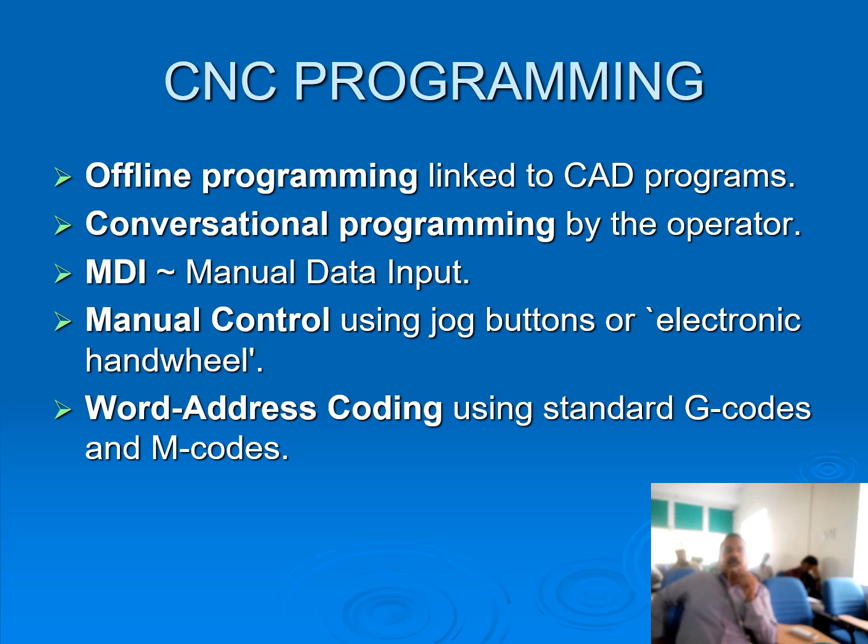The CNC programming. When it comes to CNC programming, there is offline programming linked to CAD programs, conversational programming by the operator, manual data input (MDI), manual control using jog buttons or electronic handwheel, and word address coding using standard G codes and M codes.

Now the basics of NC part programming. During secondary motion, either the tool moves relative to the workpiece or the workpiece moves relative to the tool. In NC programming, it is always assumed that the tool moves relative to the workpiece, no matter what the real situation is. This is an important point to be noted. In a real situation, the workpiece may move relative to the tool, but in programs we assume the tool moves relative to the workpiece.

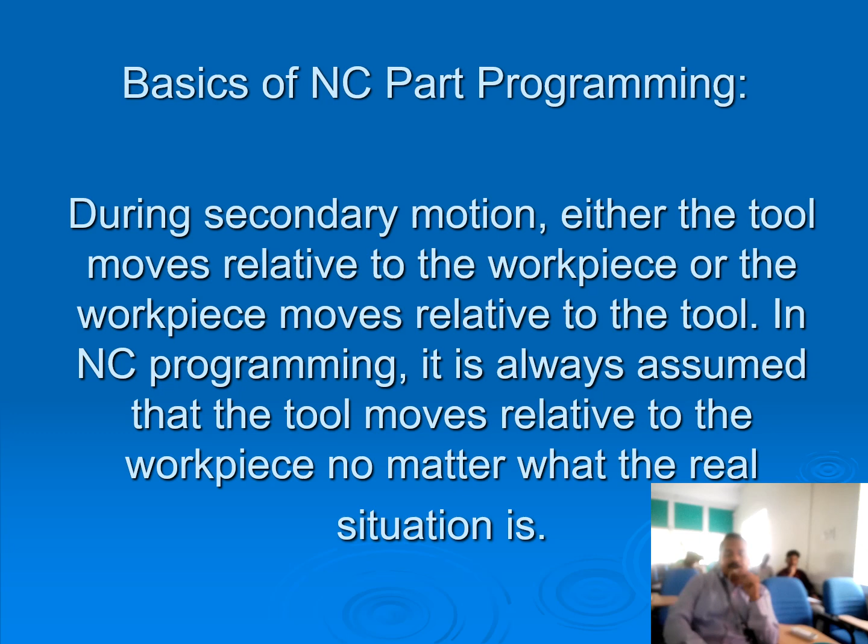The position of the tool is described using a Cartesian coordinate system. If the 0,0,0 position can be defined by the operator, it is called floating zero. In defining the motion of the tool from one point to another, either absolute positioning mode or incremental positioning mode can be used.

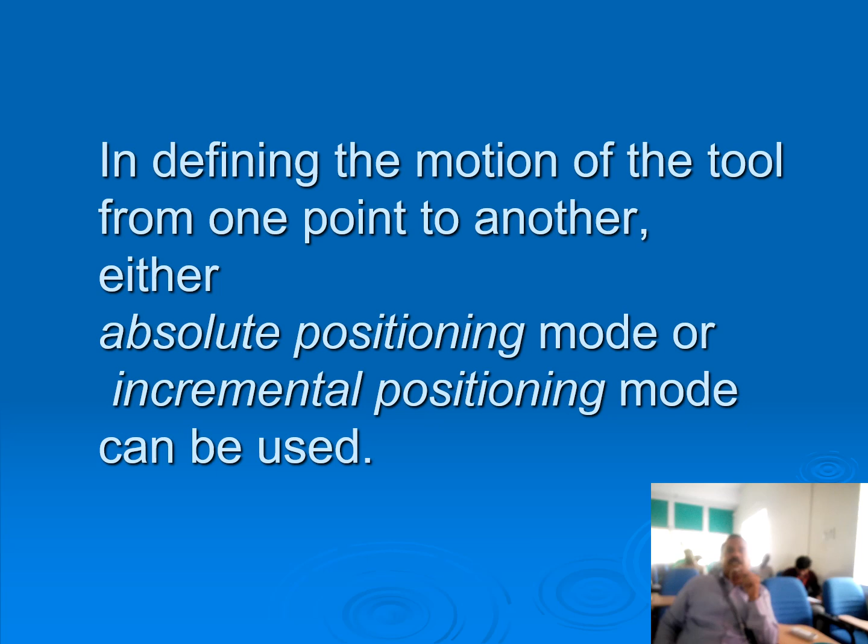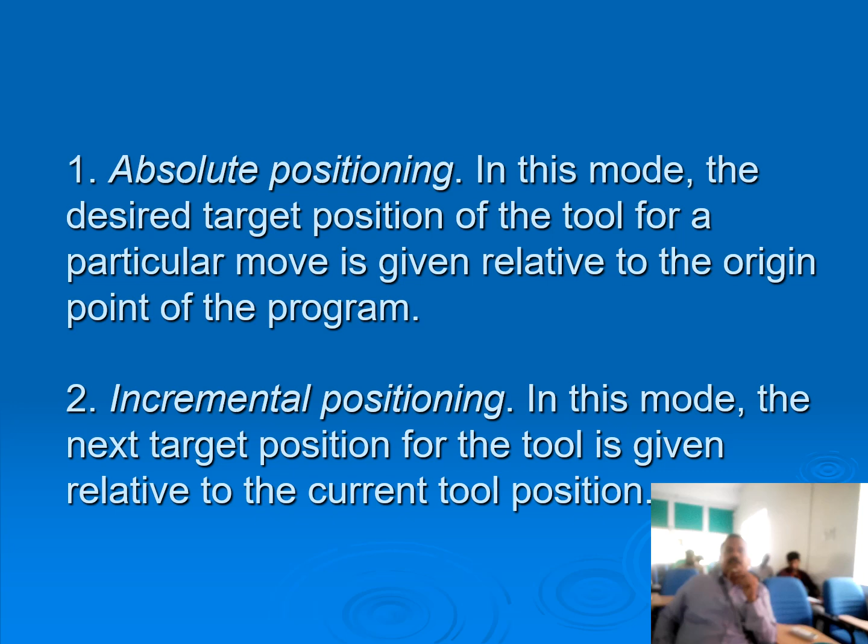What is absolute positioning? In this mode, the desired target position of the tool for a particular move is given relative to the origin point of the program. Incremental positioning: in this mode, the next target position for the tool is given relative to the current tool position.

The structure of an NC part program: commands are input into the controller in units called blocks or statements. The format of the block can be fixed sequential format, tab sequential format, or word address format. Let's see with an example.

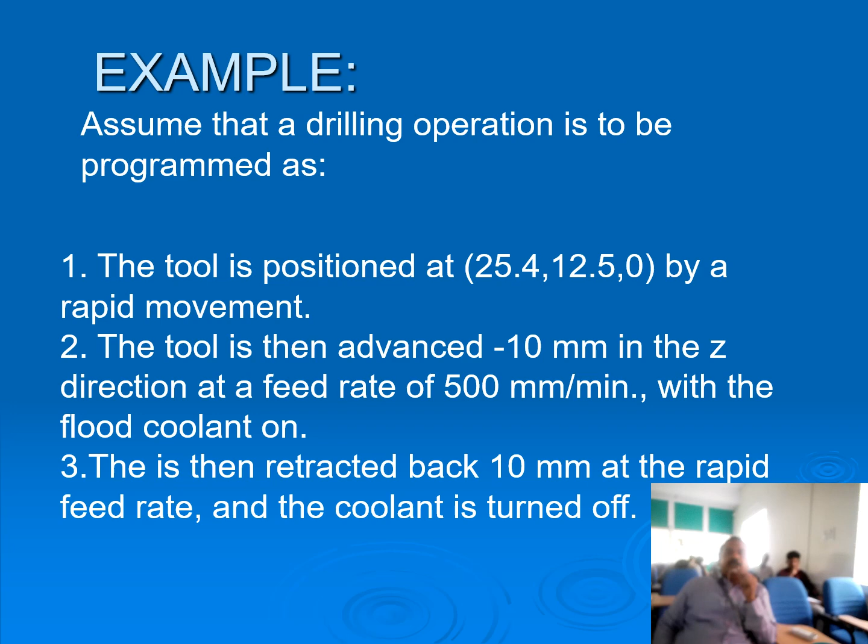Assume that a drilling operation is to be programmed, where the tool is positioned at X 25.4, Y at 12.5 and Z at 0 by a rapid movement. The tool is then advanced 10 millimeters in the Z direction at a feed rate of 500 millimeters per minute with flood coolant on. Then it is retracted back 10 millimeters at the rapid feed rate and the coolant is turned off. Now this is a program for that, in fixed sequential format.

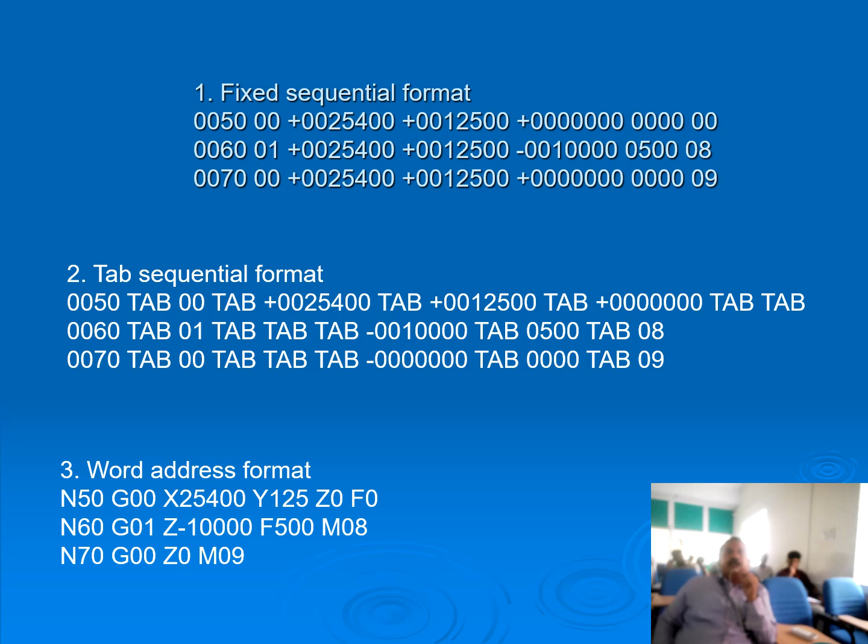We write the program in this way. When it comes to tab sequential format, the same program is written in this format. And when it comes to word address format, the same is written like this.

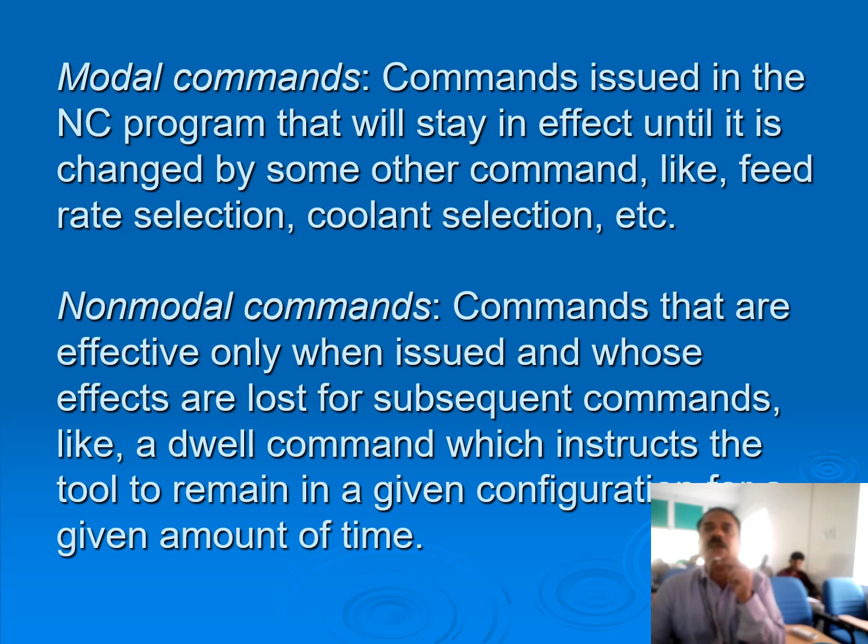Modal commands are commands issued in the NC program that stay in effect until changed by some other command, like feed rate, cutter selection, coolant selection, etc. Non-modal commands are commands that are effective only when issued, and whose effects are lost for subsequent commands, like a dwell command which instructs the tool to remain in a given configuration for a given amount of time.